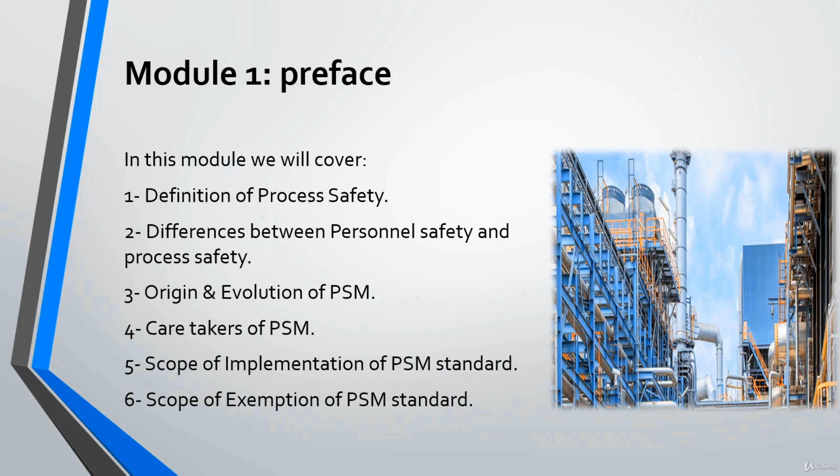Let's start by knowing what we are going to discuss in this section. We will have a clear definition of process safety management. We will know the differences between personal safety and process safety. We will look also through the origin and evolution of process safety management, who are the caretakers of process safety management, and also we will know the scope of implementation and exemption for this PSM standard, or the process safety management standard.

Okay, so let's start by defining what is process safety. Many definitions you will find throughout many organizations, but there is somehow a shared point between all of these definitions. The true definition of process safety is a disciplined framework for managing the integrity of operating systems and processes handling hazardous substances by applying good design principles, engineering, and operating and maintenance practices. So the true definition of process safety is to manage the integrity. The integrity is the prevention of major accidents by applying sound mechanical design and good engineering practices.

Okay? So now we want to know what are the key differences between personal, which is occupational safety, and process safety. In this table you'll find 10 points of differences between process safety and occupational safety. We will discuss them respectively. Number one, the frequency of incidents. The frequency of incidents relevant to process safety will be lower. If you look through incidents like Piper Alpha or British Petroleum Horizon, you'll find that these incidents are not the everyday event like any occupational injury or occupational illness.

However, the consequence of the incidents relevant to process safety will be catastrophic. So, low probability and very, very high severity. You will find this in contrast with occupational safety. As you can see, the frequency of incidents is much higher and the consequence of incidents is lower.

So now we're talking about the target. What is the target of process safety and what is the target of occupational safety? From the definition, you will see that process safety's target is to prevent the unintentional release of chemicals, while occupational safety's target is to prevent workplace hazards. I think the difference between the targets is very significant. Okay, moving on to the umbrella. Process safety protects everyone, while occupational safety doesn't. It only focuses on the workforce.

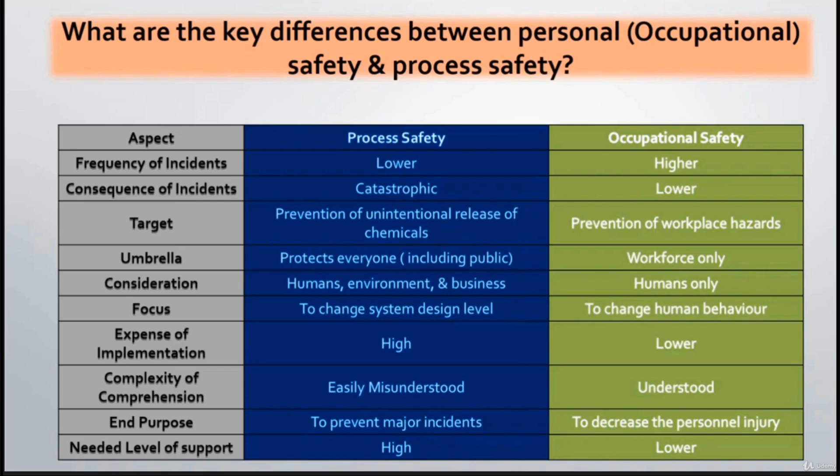It cannot be easily communicated or endorsed by the management. This is new stuff for them. They need to understand it well. That's why we are going to discuss the elements in detail. Specifically, you will find that the first element of process safety management as we move forward will be employee involvement. So you'll get the idea that this trend needs a lot of support.

Okay. Why should we have process safety management in our organization? Why do you want to have this system? What is the significance of having this system in your organization? I believe we have three main categories. You will find a moral reason, a legal reason, and a financial reason.

The moral reason: if you study or have looked through major disasters which happened in the past, like Piper Alpha or Deepwater Horizon, you will find that these incidents could have been prevented if only process safety measures were taken. You could have avoided all of these needless fatalities if only process safety management measures were applied.

What about the legal reasons? I believe you might need to have this system in order to comply with legislation and meet your legal obligations. And at last, the financial reason is to eliminate the catastrophic costs of process safety incidents. If you see the cost of an incident like Deepwater Horizon, it cost more than $62 billion, and we are talking about direct and indirect costs of this incident. Okay, moving on to the next slide.

When did the PSM appear? On July 17, 1990, OSHA, or Occupational Safety and Health Administration in the United States of America, published in the Federal Register number 55 FR 29150 a proposed standard called the Process Safety Management of Highly Hazardous Chemicals. This proposed standard was enacted in 1992, and further amendments were done in 1992, 1996, 2012, and 2013.

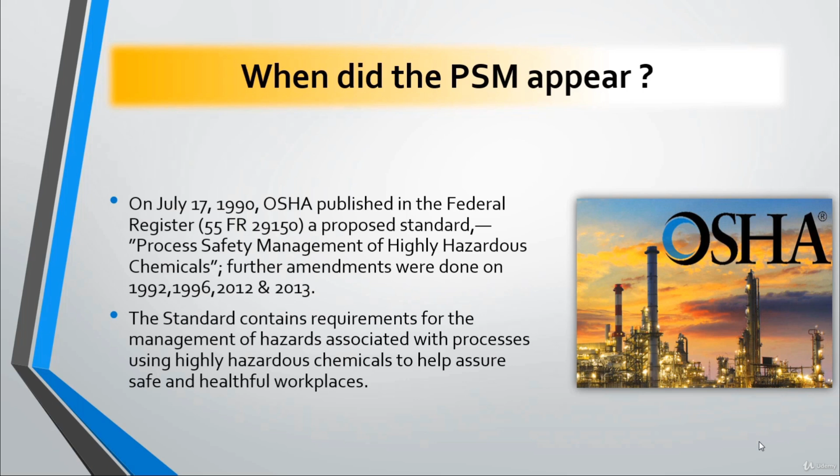The standard contains requirements for the management of hazards associated with processes using highly hazardous chemicals to help assure a safe and healthful workplace. This standard has 14 elements. We will discuss them in rigorous detail. Don't worry, you will know it all. We're just giving you the preface.

So now we are going to talk about who are the caretakers of process safety. We have number 1, OSHA, the Occupational Safety and Health Administration in the United States. We have the CCPS, the Center for Chemical Process Safety, also in the United States. We have the IOGP, the International Association of Oil and Gas Producers. We have the API, the American Petroleum Institute, and last we have the HSE, the Health and Safety Executive in the UK.

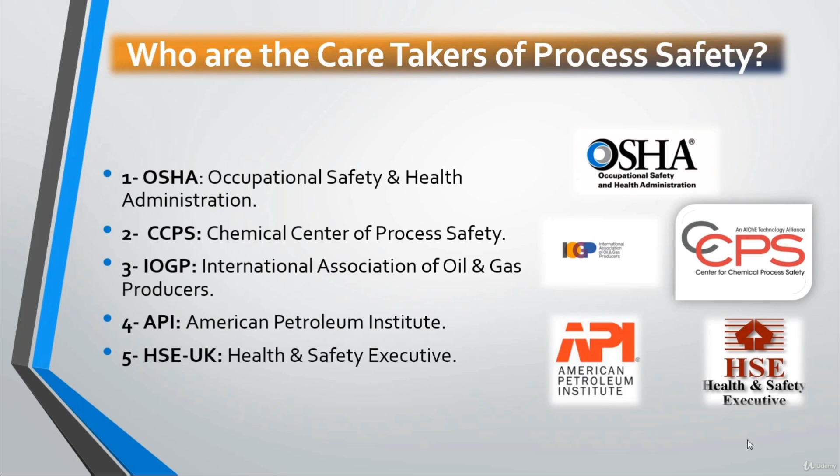Okay? Now we want to know what are the strategic approaches to process safety. Basically, we have 2 strategic approaches: the standard-based approach and the risk-based approach. This course mainly focuses on the standard-based approach. However, we are going to make some interrelations between the two. The standard-based approach entitles you to know what you should do, and this approach is adopted by OSHA. As you know, OSHA already published a standard that covers all the elements of process safety management.

While the risk-based approach is adopted by CCPS, and it entitles you to how to better manage the risk. The risk-based approach is derived from the standard-based approach. However, there are some more variations the risk-based approach has headed to, and we will also mention this along the pathway of the course. Okay, so now we're going to the standard-based approach.

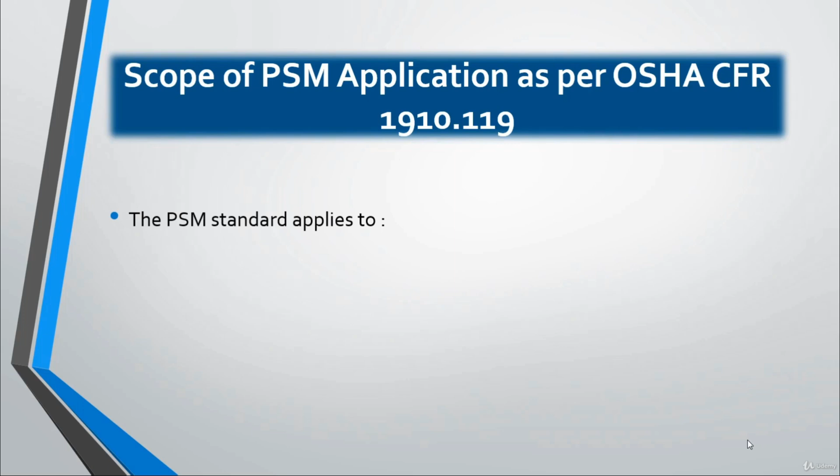What is the scope of application of this standard? The PSM standard is 1910.119. Number 1, this standard applies to a process which involves a specific chemical at or above the specified threshold quantities. From this statement we have a definition of process, and we want to know the threshold quantities. OSHA defines the process as any activity involving a highly hazardous chemical, including using, storing, manufacturing, handling, or moving such chemicals at the site, or any combination of these activities.

Now you already know the definition of process. We want to know what the threshold quantities are and what a highly hazardous chemical is. The threshold quantities cannot be exceeded whatsoever, because if they are exceeded, then you are facing a hazard. The hazard could be fire, it could be intoxication, it could be any other harmful event.

Regarding the highly hazardous chemicals, OSHA has released an appendix to this standard. This appendix contains 137 listed highly hazardous chemicals, and you will see the threshold quantities mentioned clearly. So if you are doing a process which involves a highly hazardous chemical at or above the threshold quantities in this appendix, then this standard applies to you.

I have already attached this appendix in the course resources, so you can check it to see the 137 listed chemicals and their threshold quantities. If you want to know how to calculate the threshold quantities, just ask in the course discussion board, and we can solve some problems together. So, what else does this standard cover?

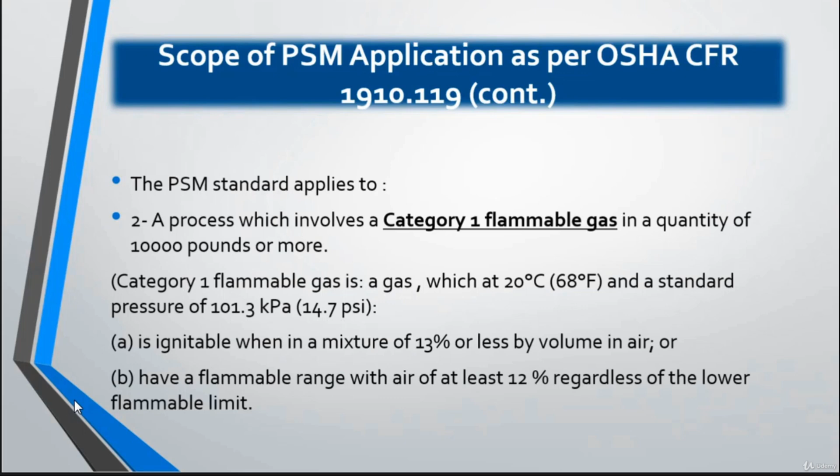What are all of these heebie-jeebies? Let's find out more. What is the lower flammable limit, what is the upper flammable limit, and what is the flammable range? The lower flammable limit, or lower explosive limit, is the lowest concentration over which a flammable gas or vapor can be ignited at a given temperature and pressure. This is the lowest concentration that can give you a flammable or explosive mixture with air. From the definition we see that they are talking about standard temperature and pressure, so 20 degrees centigrade and 14.7 psi.

And at last, what is the area of coverage for the PSM standard? It involves a process which involves a flammable liquid with a flash point below 100 degrees Fahrenheit on site in one location in a quantity of 10,000 pounds or more. What is the definition of flash point? The flash point is the lowest temperature at which the flammable vapor of the material will ignite when given an ignition source. This ignition will be a flash fire, which means it will not be continuous. If the ignition source is removed, the flash fire will cease.

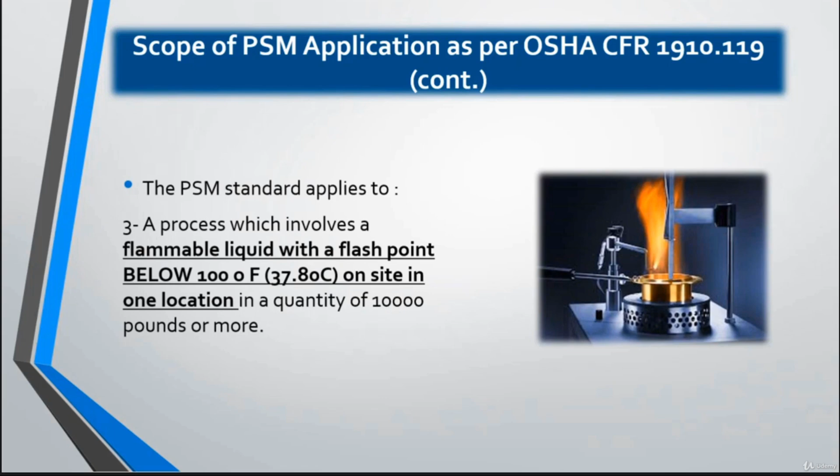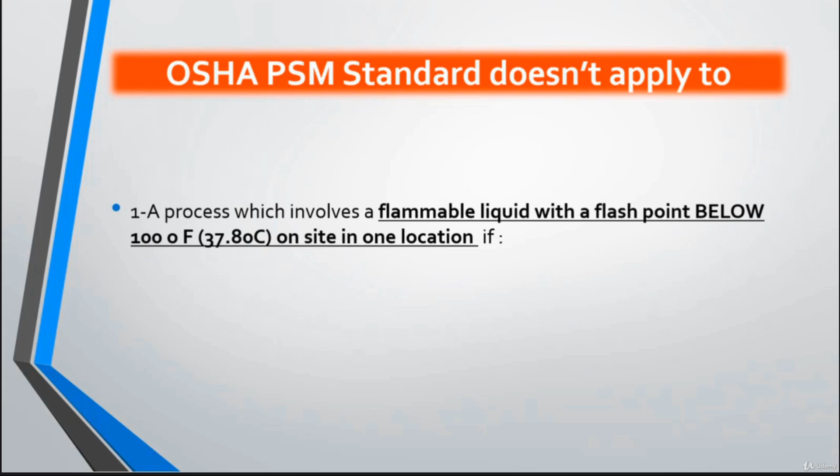Now, let's talk about the scope of exemption. What are the areas that the PSM standard doesn't cover? The PSM standard doesn't apply to a process which involves a flammable liquid with a flash point below 100 degrees Fahrenheit on site in one location if the hydrocarbon fuels are used solely for workplace consumption as a fuel. If you have a warehouse that uses this flammable liquid only as fuel, then this standard is not applied. B, if this flammable liquid is stored in an atmospheric tank or kept below the normal boiling point without benefit of chilling or refrigeration.

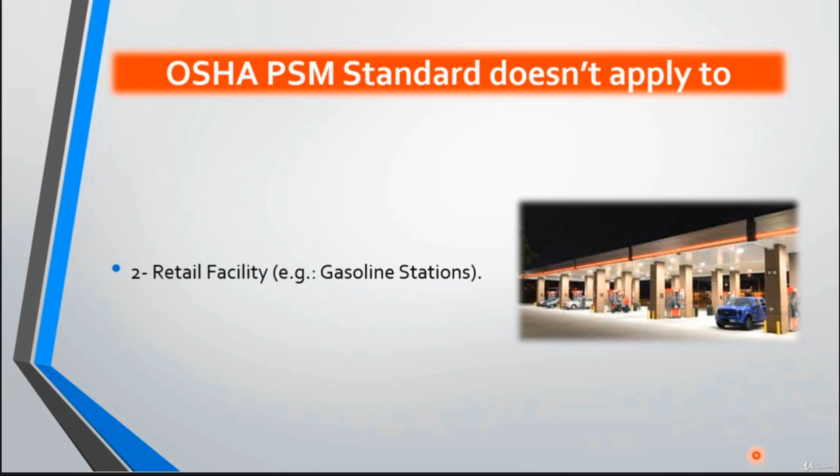The OSHA PSM doesn't apply to retail facilities such as gasoline stations. OSHA already released a retail exemption policy to exclude retail facilities from the scope of PSM. Why is that? Quite frankly, it's pretty strange, but OSHA doesn't believe that highly hazardous chemicals would exist in such a facility in a quantity of 10,000 pounds or more. The OSHA PSM standard doesn't apply to oil and gas drilling or servicing operations, such as platforms, workover rigs and so on.

At last, the OSHA PSM standard doesn't apply to normally unoccupied remote facilities, such as unmanned offshore platforms. By definition, a normally unoccupied facility is one that is operated, maintained, or serviced by employees who visit only periodically to check the operation and perform necessary operating or maintenance tasks. No employees are permanently stationed there, and the facility must be geographically remote in order to meet the requirements.

So hello and welcome to module number 2 of the PSM course. This module is the most important one as it is the core of our course, so it will be the longest and the largest. Okay, so let's go directly to module number 2. Let's start. In this module, we will cover the following.

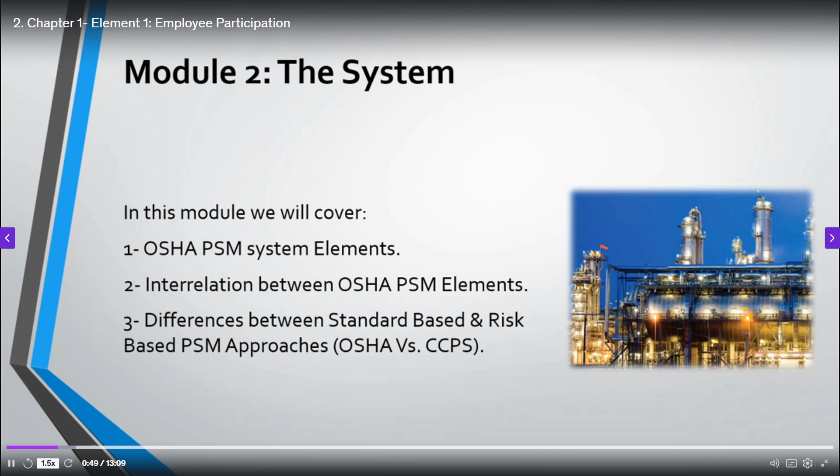It starts with employee involvement. If you recall, when we talked about employer involvement and the promotion of safety culture, we said that we will go to the first pillar of the PSM standard, which is employee involvement. And hence, they put it as the first pillar of the PSM system.

Number 2 will be process safety information, followed by process hazard analysis, operating procedures, training, contractors, pre-startup safety review, mechanical integrity, hot work, management of change, incident investigation, emergency planning and response, compliance audits, and at last, trade secrets. These elements are somehow interrelated, but first we will study each individual element separately, and at the end of this module we will see the interrelation between these elements.

Okay, so let's start with the first element, employee participation or involvement, also known in the European school as safety leadership. OSHA mandates the following regarding this element. Number one, employers shall develop a written plan of action regarding employee participation, which means that this plan should include how the employees are going to participate in order to promote the health and safety culture or the process safety culture.

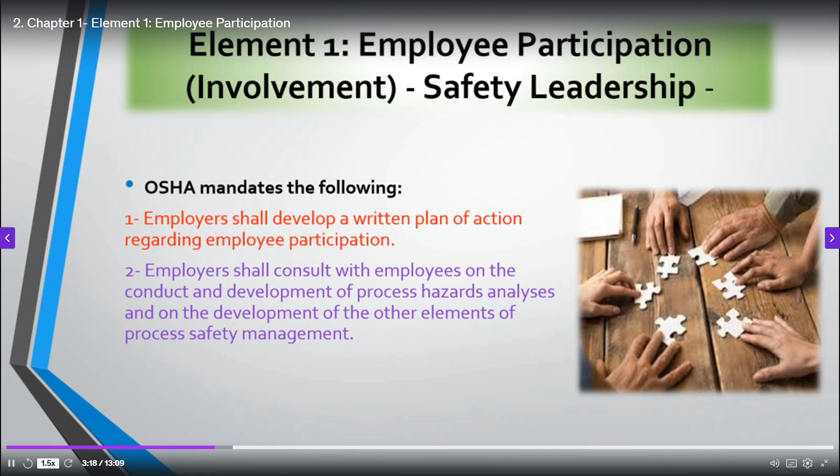Number two, employers shall consult with employees on the conduct and development of process hazard analyses and on the development of other elements of process safety management. Okay, so this paragraph entitles employers to consult with employees regarding the development of process hazard analyses and other elements of PSM. So basically this element defines how the employee shall participate in the development of PSM and how the employer himself should promote the process safety culture.

Number five, setting the targets. And at last, commitment towards continuous improvement. So these are the criteria which define a healthy process safety leadership. And these criteria must be endorsed by managers and directors. We are going to discuss the individual elements together. Now we are going to talk about criterion number one, which is the hazard and risk awareness of PS leadership.

History has shown that most disasters which happen in the world are due to three main reasons. Number one is a lack of technical knowledge by management, which means that the management is over-focused on administrative stuff and neglects the technicalities. Number two will be the lack of information, lack of reporting guidelines and reporting routes to the management. And at last, poor decision making and the underestimation of the consequences of decisions,

which means that sometimes management gets stuck with the technical staff taking some decisions that may affect the integrity of the plant itself. And such decisions could be like delaying plant maintenance of an old plant or cutting the critical staff, who are the people who are irreplaceable by all means and cannot be replaced easily.

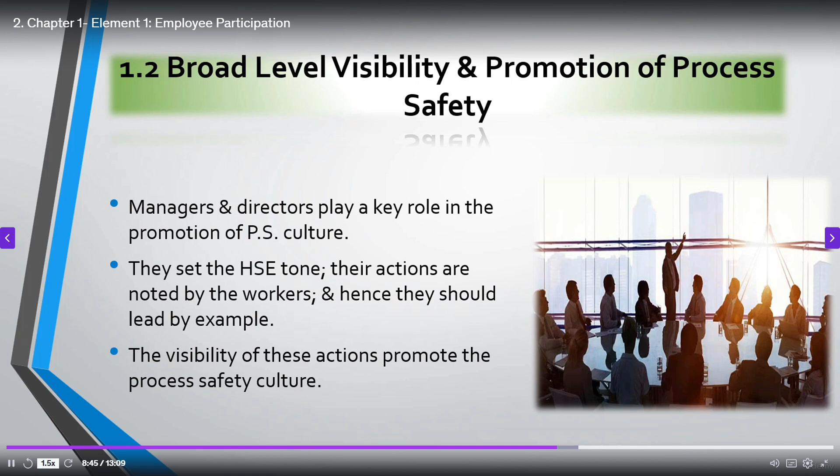Okay, moving up to criterion number 3, definition of responsibilities. This criterion is considered as one of the most important criteria in the definition of a healthy process safety leadership, which means that all responsibilities must be clearly defined and clearly communicated to employees. Everyone should know what they have to do, and this must be entitled accurately. Okay, so everyone who plays a role in the PSM framework should be held accountable for their actions, regardless of their organizational level, without endorsing the individual blame culture.

And if you take any trend of safety, like occupational safety or functional safety or process safety, you will see that no blame culture is the slogan of all of these trends. So you shouldn't endorse the blame culture in process safety.

Okay, moving up to the next criterion. The provision of adequate resources. If you recall in module number 1 regarding the comparison, process safety is more expensive. So I believe provision of adequate resources is a very important criterion in the definition of a healthy process safety leadership. So the resources can be human, the right number of people who have the right skills and experience; financial, which may include the capital expenditure and operational budgets.

And regarding this point also, we said in the table that process safety is expensive in comparison with occupational safety. So you can't expect an unlimited budget. Okay, it will not be reasonable to have an unlimited budget. However, under-resourcing is a risky business, so you should lie in the middle. And at last, the physical resources such as equipment, buildings, offices, rest facilities, and so on. I believe this is clear.

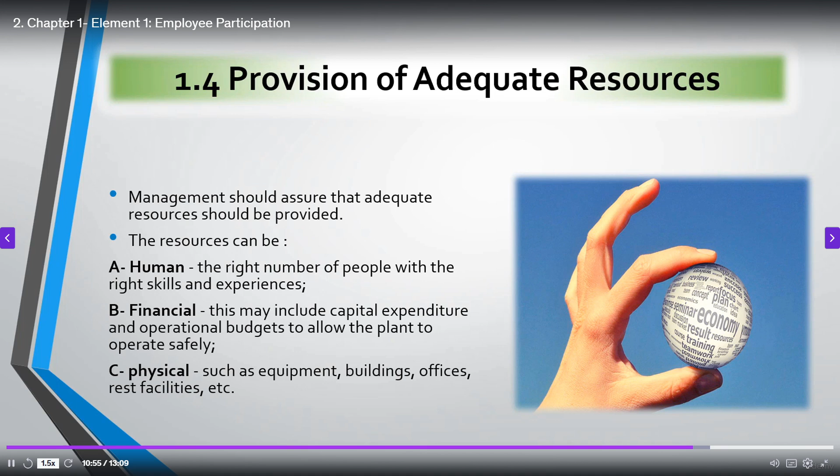Let's move up to criterion number 5, the setting of objectives. If you're not measuring, you're not managing. So you should have a clear and effective set of short-term and long-term process safety objectives. These objectives must be SMART, which means specific, measurable, achievable, realistic, and time framed.

These objectives also should be done in consultation with employees. The management shouldn't go on its own and set these objectives and force the employees to achieve them. No, this is not a healthy PS culture. We are talking about the involvement of employees, so the employees should be involved. So how do I know that my objectives are effective, or how do I monitor the progress of my process? You should set what is known as KPIs, or key performance indicators, and we will discuss this in detail in module number 3.

Okay, moving up to the last criterion of process safety management leadership, the commitment towards continuous improvement. As you know, any management system contains the cycle PDCA: Plan, Do, Check, Act. So you need to actively monitor your safety performance. The active performance measurement or active performance monitoring should be done throughout the benchmarking or throughout the auditing process. You will find where your system is exactly, and hence you will do whatever means is necessary to rectify and to assure continuous improvement of your system.

I believe now we have finished the criteria of a healthy PS leadership, and now the module or element number 1 is completed. Stay tuned for element 2.

Hello and welcome to element number 2 of the process safety management system. At this element, we will discuss the process safety information in detail. So let's hop aboard. What is the definition of process safety information? Process safety information is a set of written compiled information which concerns process CTE. CTE is an abbreviation for chemical, technology, and equipment. So C for chemical, T for technology, E for equipment. On the next slide, I'm going to set some examples of process safety information.

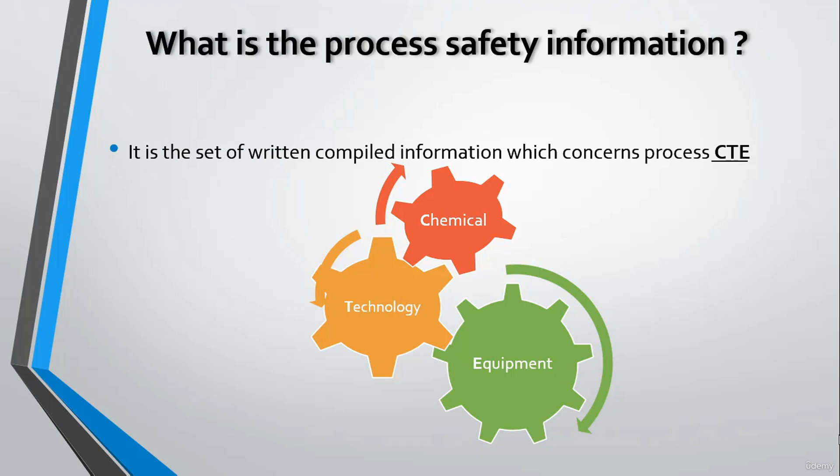Regarding the chemicals, we have the Standard Material Safety Datasheet, or MSDS for short. Also, we have the chemical analysis of multi-phase stream. Regarding the technology, we have the block flow diagram, process flow diagram, process chemistry, maximum intended inventory, safe parameters, evaluation of the consequences of deviations, also known as the worst case scenario evaluation.

And regarding the equipment, we have the material of construction, the P&IDs, or piping and instrumentation diagrams. We have the electrical classification, the relief systems and design basis, the ventilation systems design, the design code and standards, the material and energy balance, and at last the safety systems, which are the interlocks, detection, or suppression systems. We are going to illustrate some of these examples on this element.

So let's start by the chemicals. As you can see on this slide, we have 16 components of a standard material safety datasheet. The source of these components is OSHA 1910.1200. This is the standard which sets the requirements for a standard MSDS. OSHA PSM stated that it is mandatory to have, at least in the MSDS, the following components. Let me just get my laser pointer.

OSHA PSM said that we should have element number 6, which is the accident release measures. Element number 8, the exposure control measures. Element number 9, the chemical and physical properties. Element number 10, stability and reactivity of the material. And element number 11. So 6, 8, 9, 10, and 11.

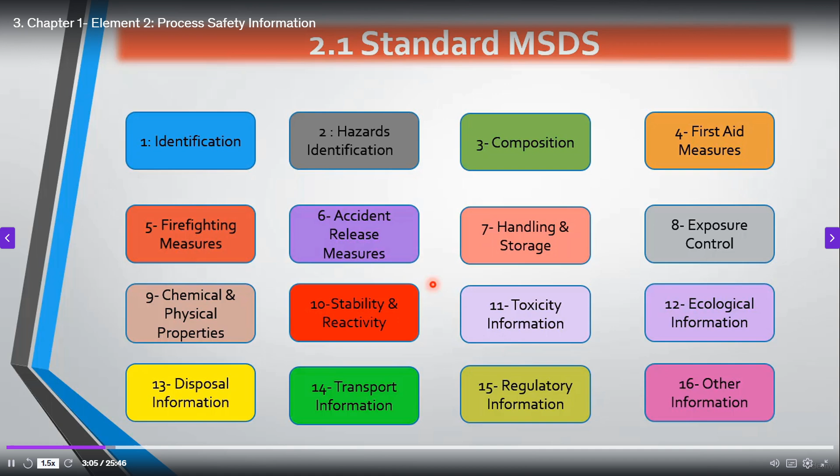Why are these elements mandatory in any MSDS? Because they are so relevant to the trend of process safety management, which is the prevention of major accidents such as fires, explosions, leaks, toxic gas releases. So it is very substantial for any MSDS to have accident release measures, exposure control measures, chemical and physical properties, stability and reactivity of the material, and toxicity information. I hope this is clear.

Let's move on. Regarding the technology, we will discuss the block flow diagram, the process flow diagram, process chemistry, and evaluation of consequences of deviations. So let's start with the block flow diagram. What is the block flow diagram? It is a simplified diagram showing major process equipment and interconnecting process flow lines. It also demonstrates information about flow rates, stream composition, temperature, and pressure.

But please be advised that this information is not necessarily present in all BFDs. So don't expect to have much information about the flow rates or stream composition. It's not mandatory to have it, but it is mandatory to have all the major process equipment and also the interconnecting process flow lines.

So let's use this BFD as an example. As you can see, the toluene here is going as a feed with hydrogen gas. The flow rate of toluene is 10,000 kilograms per hour, while the flow rate of hydrogen is 820 kilograms per hour. They go inside the reactor. The outcome will be the effluent, which goes to a separator, at which the gas is separated from the liquids. The gas goes up with a flow rate up to 2,610 kilograms per hour, while the liquid is going to a distillation tower, at which the benzene is extracted with a flow rate of 8,210 kilograms per hour, while the recycled toluene goes back to the reactor as a feed.

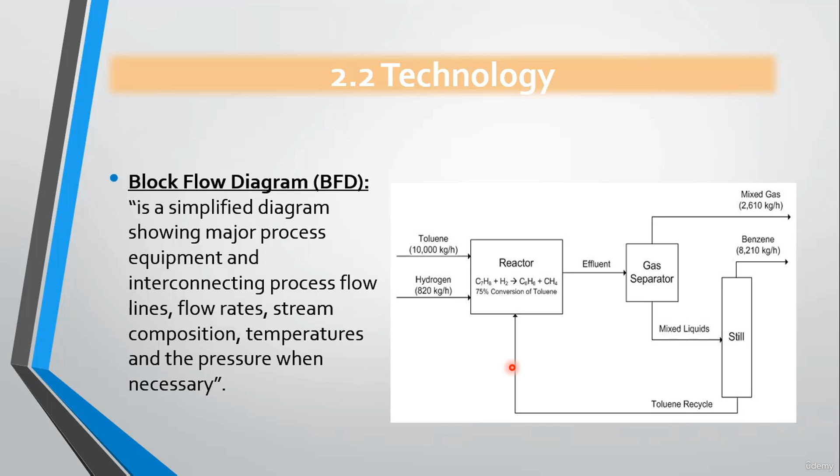So, in other words, it's just a preliminary diagram which demonstrates generic information about the process. And also, please be aware that the block flow diagram is also used as an input in the hazard identification studies or hazard studies, because hazard studies don't require that much level of detail, unlike other risk assessment studies such as HAZOP. Okay, let's move on to process flow diagrams or PFDs.

Here we have a more complex diagram which shows all main flow streams, including valves. Also, it shows pressures and temperatures on all feed and product lines. Also, it shows the points of pressure and temperature control. It gives us also information about the construction materials, pump capacities, compressor horsepower, vessel design pressure, major control loops, etc. So it gives you more detailed, more rigorous, more complex information about your process, unlike BFDs.

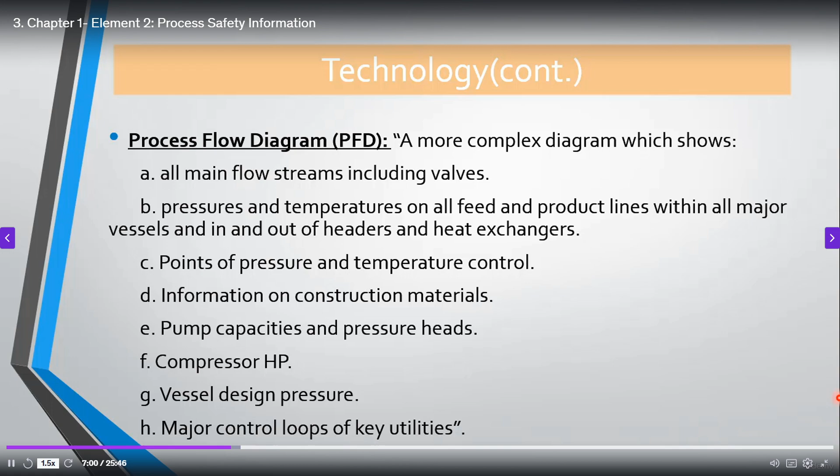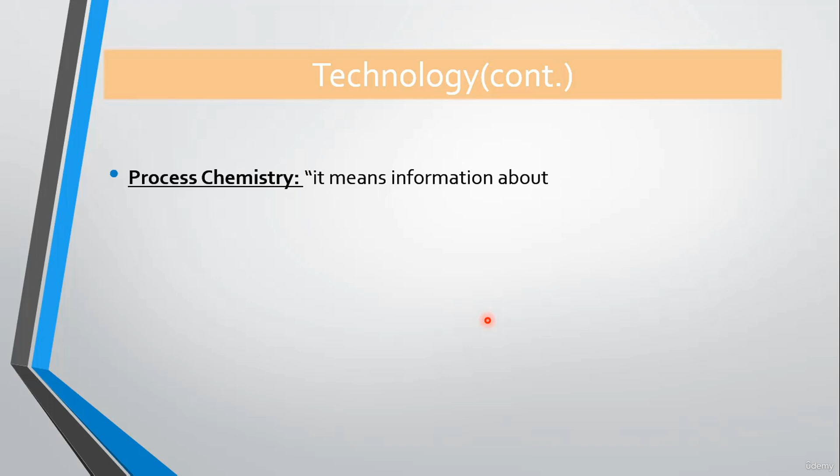Okay, let's move on. Let's go to the process chemistry. What do we mean by process chemistry or process chemistry information? Process chemistry information means information about the type of the facility, whether it is upstream, midstream, downstream, you name it. Also, it means information about the sorts of operations running inside, the types of chemical reactions and interactions. So, such information could be provided in the form of philosophy of operation, basis of design, design concept, whatever the name of the document is, it should provide the previously mentioned requirements.

So, in other words, the term process chemistry entitles to give you details about what is being processed in the plant and how is it done. Okay, hope it's clear. Let's move on.

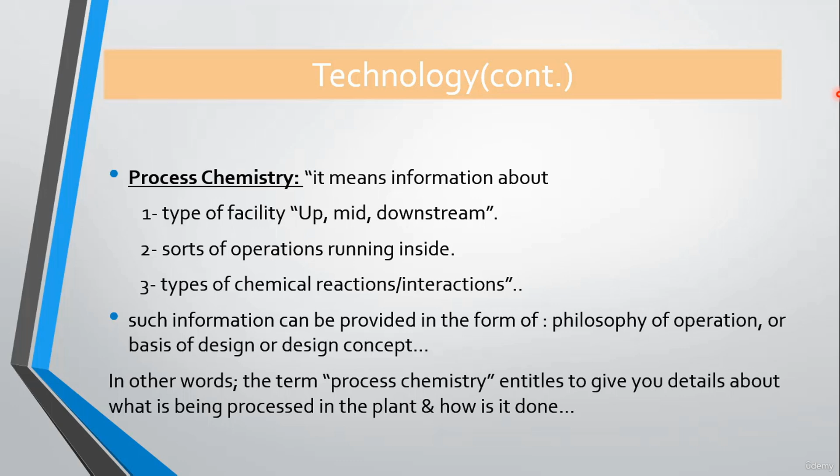The evaluation of the consequences of deviations. What is deviation? Or what is the definition of a deviation? A deviation is something which will go wrong or an outcome that is undesirable. So I need to evaluate the outcome of this undesirable event. How do I do that? Or how do I define the consequence of deviations? The answer for this is pretty simple.

We can use a technique called the what-if technique. And this technique will evaluate what will be the outcome if a deviation from the safe operating limits takes place. The what-if technique will be illustrated later on in element number 3, but let's focus on what we have right now. This evaluation will give us a rough assessment of the worst case scenario which may occur in the plant.

And also you can use software such as ALOHA. This software is developed by EPA and you can download it for free on their website. This software will give you a simulation or an estimate of the threat zone for fires, explosions, toxic gas releases, or BLEVE. But please be aware that this software is dependent upon knowing the maximum intended inventory, operating parameters, and others. Others include the wind speed, wind direction, the pipeline diameter, and so on.

Okay, so in the process safety information element, you need to evaluate the consequences of the deviations which may take place alongside the life cycle of the plant. I hope it's clear. Let's move on.

Now, enough talking about technology. Let's move on to the equipment. And here we are going to start with the material of construction. And I have a question in mind. Why should I have to know the material of construction for vessels, piping, or any conveying medium? Why? I will give you 10 seconds for this, then I will provide an answer.

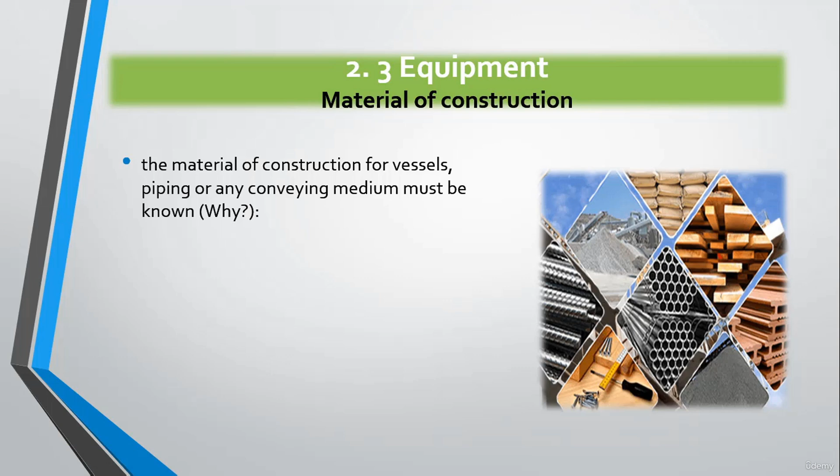There are two reasons why you should know the material of construction for any vessels, piping, or conveying medium. One, to assure the physical compatibility of it with the nature of operation running in place in terms of pressure, temperature tolerance, strength, stress, corrosion resistance, etc. And also it should consider the upsets in operation which can happen frequently or more often.

The second reason would be to assure the chemical compatibility of it with the conveyed medium, and this is done to prevent undesirable reactivity hazards. So, in other words, you should know the material of construction of your vessel, piping, or conveying medium in order to assure the physical compatibility and the chemical compatibility.

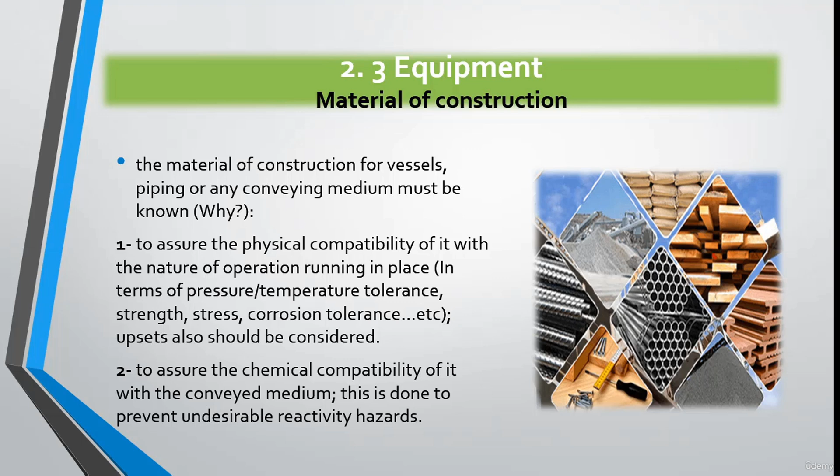Okay? Let's move to item number 2 in the equipment, the piping and instrumentation diagram. This diagram has a higher level of detail in comparison with the process flow diagram.

It contains all the information listed in the PFD, plus it describes the relationships between equipment and instrumentation, as well as other relevant information that will enhance clarity. So if you have a pyramid of detail regarding the process itself, you will start with the block flow diagram, above it you will have the process flow diagram, and on the top of the pyramid, you will have the piping and instrumentation diagram.

The next slide, I'm going to show you an example of it. This is an example of a typical pig launcher. As you can see here, the level of detail is much more advanced, much more rigorous. You will have different types of valves, vents, flares, kicker lines, and instrumentation, pressure transmitter, whatever is existing, and it is very, very detailed, as you can see.

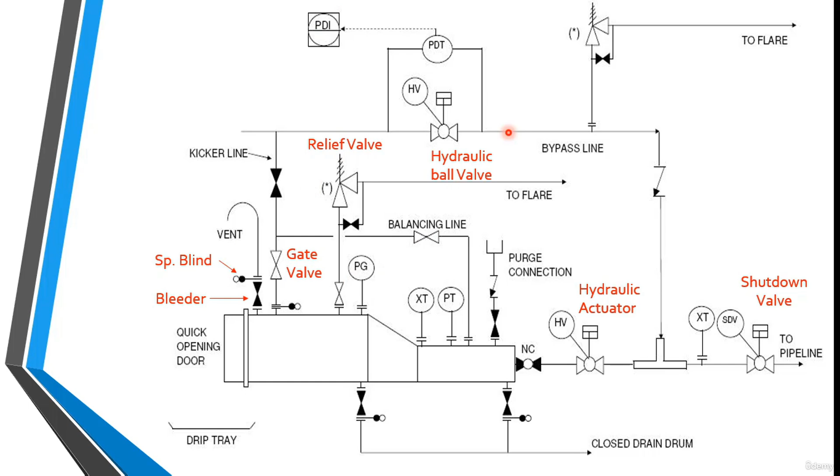Okay, so how do I know all of these symbols? This is a very important question. How do you figure out what this symbol means? A quick tip for you, there are two standards that you can use to identify the symbols stated in the P&IDs. You can use the ISO 14617-6 or you can use the ANSI ISA 5.1. These are internationally recognized standards. You will find most of the symbols of the P&IDs within them. You will have a better knowledge about all of them.

But be aware that the legend symbols of the P&IDs may be referenced or custom tailored, and I mean here that the company may have custom designed or custom tailored symbols that the company itself chose to put as a symbol on the P&ID. So be aware of that. The advice for you is to seek the legend first, if available, before diving into standards. I'm just giving you a quick tip.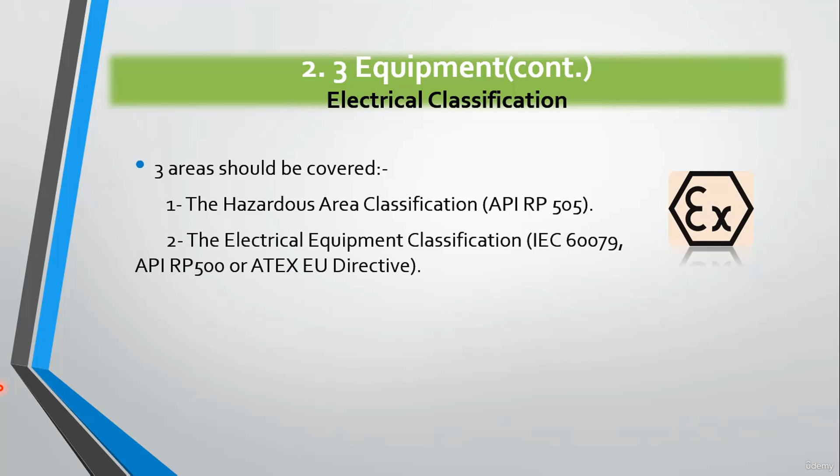Okay, let's move on. The electrical classification. Three areas here should be covered about the electrical classification. Number 1, the hazardous area classification. Whether it is zone 0, zone 1, zone 2, you should know the hazardous area classification and the basis of classification. And the best standard that you can refer to is API Recommended Practice 505. Number 2, the electrical equipment classification. And here I recall the standard IEC 60079, API Recommended Practice 500, or ATEX European Directive.

Okay? And number 3 is the ingress protection level of equipment. And please seek the standard IEC 60529. This will give you much better information about the ingress protection. So, in short, you should cover the 3 areas of hazardous area classification. You should know the area classification of your plant. And consequently, you should have a clear knowledge about the electrical equipment classification and the ingress protection in relation to environment. You will need such information for later use. Don't forget to have the datasheet for such equipment. This is a friendly advice. Forget that it is red tagged, but it is a friendly advice.

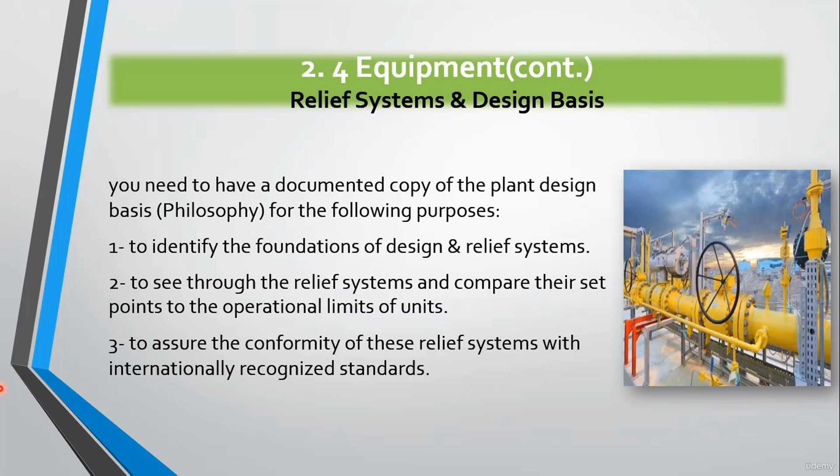Let's move on. Relief systems and design basis. You need to have a documented copy of the plant design basis for the following purposes. Number 1, to identify the foundations of the design and relief systems. And 2, to see through the relief systems and compare their set points to the operational limits of units. This is a very important and very critical information that you must have. At last, you should assure the conformity of these relief systems with internationally recognized standards. And here I recall the API standard 520, 521, and 2000. These are the best standards for relief systems.

Okay, moving on, we will discuss the ventilation systems design, and here I mean the enclosures, such as a power plant enclosure, switchgear enclosure, and etc. You should have the following information. Number one, the functional description of the ventilation system. You should know the description of the ventilation system, the fan control, alarm signals, normal versus emergency ventilation, and so on.

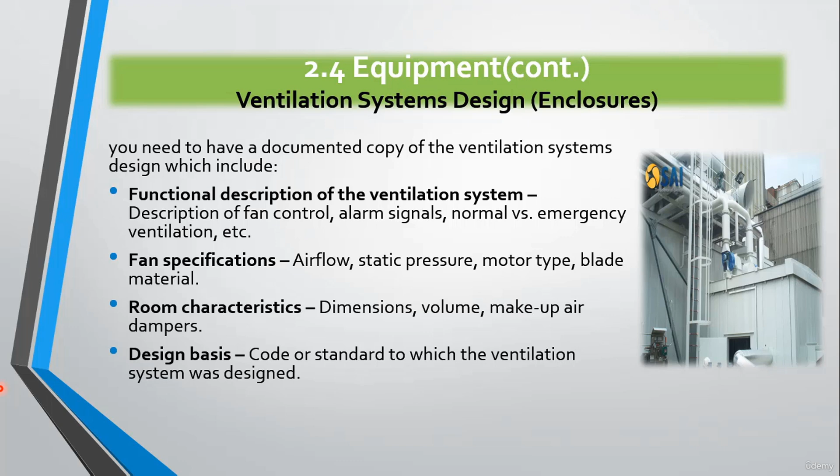Number two, you should know the fan specifications in terms of airflow, pressure, motor type, blade material, room characteristics, dimensions, volume, makeup, air dampers, design basis, code or standard to which the ventilation system was designed. And here I recall the best standards regarding the ventilation systems, which are the NFPA 30 and NFPA 58. Okay, moving on. The design code or standard.

As part of any process safety information, you should know the design code standard of manufacture or testing or maintenance or inspection of all equipment within the facility. This will give you assurance of the compatibility of use and maintenance of such equipment.

Be aware of that. As we discussed, if you recall, the material of construction, I said that we must know the material of construction in order to assure the chemical compatibility and physical compatibility. However, now on the design code or standard, you should know it all in order to give you assurance of an overall compatibility for use and maintenance.

Okay, moving on, let's talk about material or energy balance. Material or energy balance is a statement of the conservation of mass or energy as the material quantities pass through processing operations. In other terms, what goes in as a mass goes out as a mass, or what goes in as an energy must go out as an energy, provided that nothing changes.

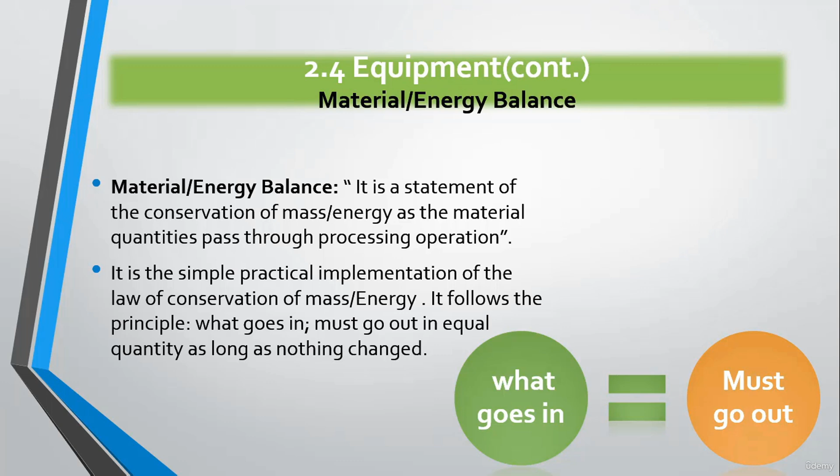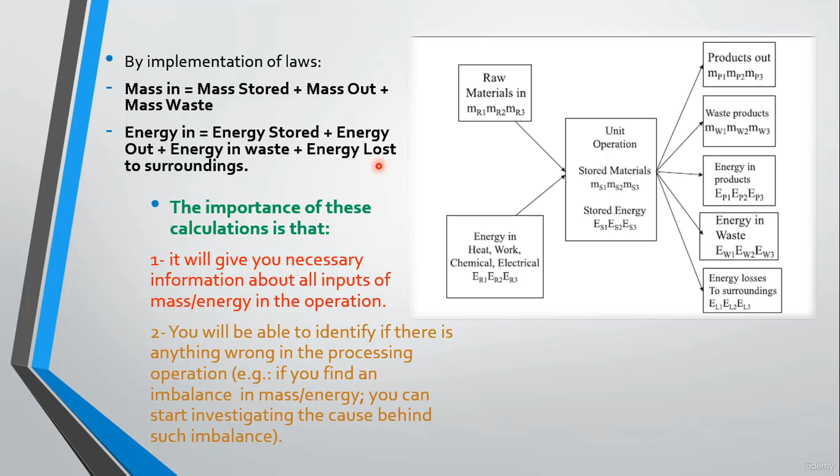For example, if you find an imbalance in the mass or energy, you can start investigating the cause of such imbalance. For example, if the mass here is not equal to the summation of this, or the product itself or the mass out is less than expected, you will start investigating the cause of such waste. And the same goes also for energy.

Okay, let's move on. We will talk at last about the safety systems, which are the interlocks, detection or suppression systems. Let's start with the safety interlock. The safety interlock is a feature that makes the state of two mechanisms or functions mutually dependent, which means that one mechanism cannot start without the presence or activation of another mechanism.

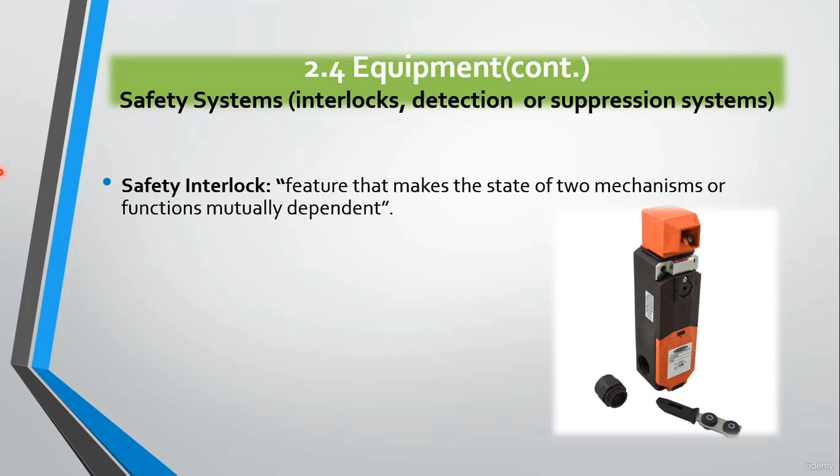A simple example of this is the safety pin, which exists on the fire extinguisher to prevent the extinguisher from being mistakenly or accidentally used. You will have to remove the pin first and use the extinguisher. So this pin acts as a safety interlock. The safety pin also for the pistol or the gun acts to prevent the gun or the pistol from being used or accidentally fired unless you unlock this safety pin.

Okay, so we have types of safety interlocks such as the trapped key interlock, microprocessor interlock, mechanical interlock, electrical interlock. Just know the names. You don't have to memorize anything. I'm just setting some simple examples. What about the safety detection systems? It includes any device that is able to detect process upsets or undesirable safety events.

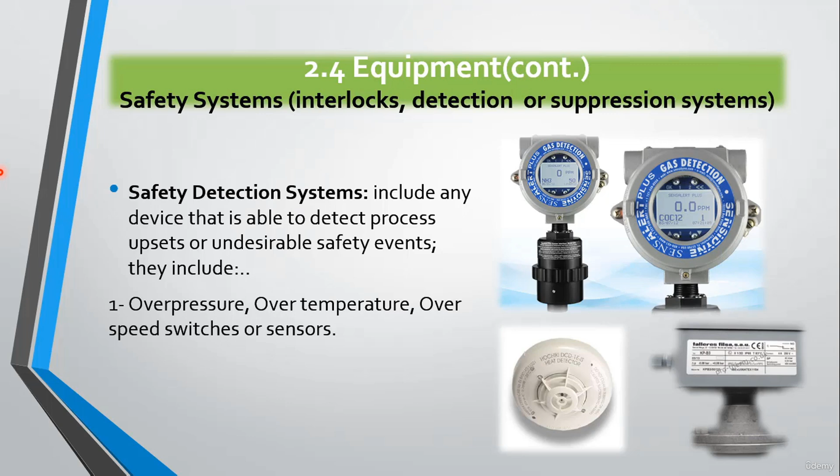So we are talking now about two layers of protection: the basic process control system protection layer and the fire and gas detection system protection layer. Okay, this includes the over pressure, over temperature, over speed switches or sensors. Number two, the fire and gas detection systems. The fire suppression systems include deluge rings, water sprinklers, chemical agents, total flooding agents such as the FM200, Inergen, CO2, etc. And also many more, of course.

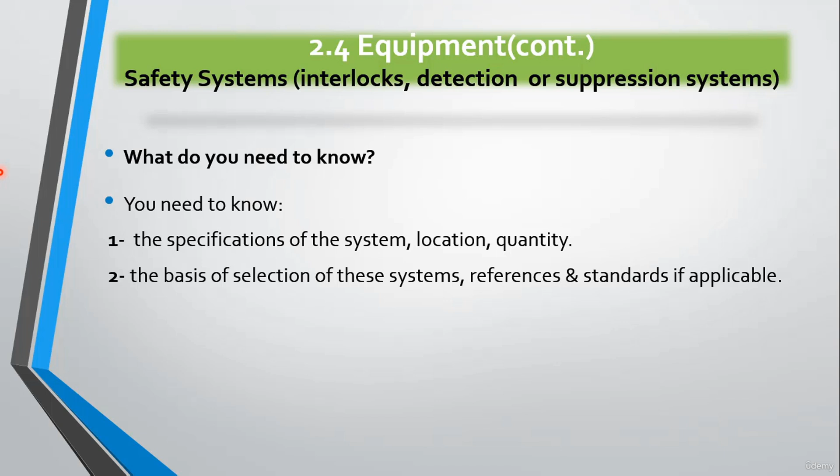So what do you need to know regarding the safety systems? You will need to know the specifications of the system, the location of the system, the quantities of the units used in the system. Number two, the basis of selection for these systems, references and standards if applicable. Number three, you will know the hydraulic and demand calculations of the suppression system to make sure that it covers the threat area. And at last, you'll have to know the types, basis of selection, allocation of fire and gas detection systems, and assure the suitability of them to the process type.

And remember, if the process safety information listed in element 2 is not or only partially available, do not proceed to element number 3 unless you fulfill them, because element number 3 depends on element number 2, and if element number 2 is not available or partially available, you will not have a successful or active or effective element number 3, which is the process hazard analysis.

You will not be able to do a correct or effective or accurate process hazard analysis unless you have appropriate inputs.

So hello and welcome to element number 3 of the process safety management system. This element will discuss the process hazard analysis, and I consider it as one of the most important, yet the most critical element of the whole process safety management system. So let's get started directly.

What is the meaning of process hazard analysis? Okay, the definition of process hazard analysis is an organized and systematic set of techniques to identify and analyze the significance of potential hazards associated with the processing or handling of highly hazardous chemicals. So, basically, the process hazard analysis is a combination of techniques or a set of different techniques which are used to identify and analyze the significance or the importance of potential hazards associated with processing and handling of highly hazardous chemicals.

Okay, the PHAs, which is short for process hazard analysis, analyze potential causes and consequences of fires, explosions, releases of toxic or flammable chemicals, and major spills of hazardous chemicals. So, as you can see, it is a very important and very critical element of the PSM system.

Okay. So, what does the PHA focus on? The PHA focuses on equipment, instrumentation, utilities, human actions, routine and non-routine, and last, it focuses on external factors such as the surrounding environment.

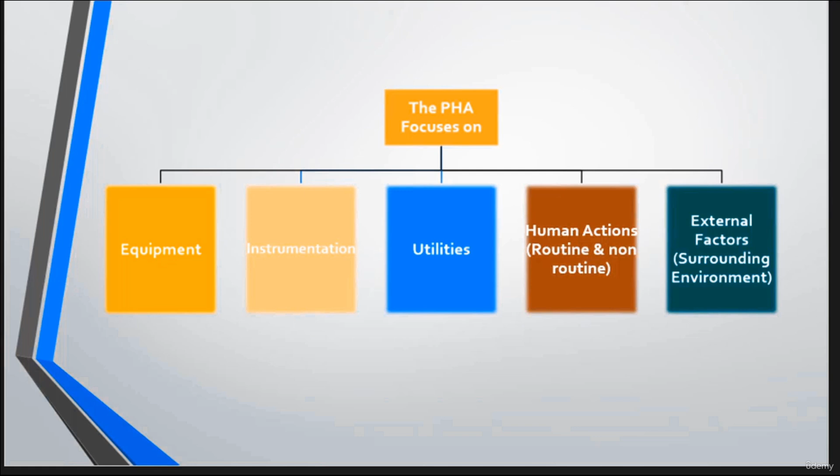Okay, but before we go in depth about the PHA techniques or the PSM related PHA techniques, let's have some definitions regarding the hazard, the risk matrix, the categories of PHA, the risk criteria, the tolerability of risk, the PHA team, main stages of PHA process, and the key elements of a high quality PHA. So you need to be familiar with all of these definitions before we get into depth regarding the PSM PHAs. Okay, so let's get started.

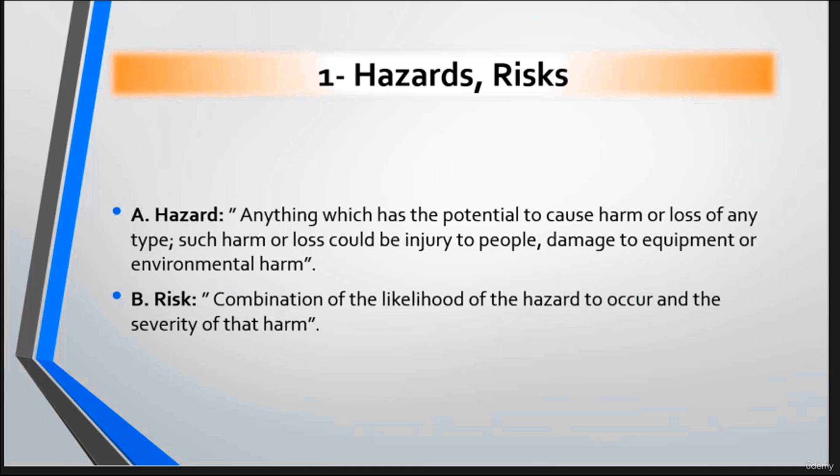What is a hazard and what is a risk? The hazard is anything which has the potential to cause harm or loss of any type. Such harm or loss could be injury to people, damage to equipment, or any environmental harm. While the risk is the combination of the likelihood of the hazard to occur and the severity of that harm. So it is the outcome of the likelihood, which is the probability or frequency, times the severity, which is also known as the consequence. Okay?

Okay, what about the risk matrix? What is the risk matrix? The risk matrix is a tool used in the PHA process to define the level of risk. It is used to give you a clear definition about the level of the risk, considering both probability and severity. As you recall from the previous slide, we said that the risk is the combination of the likelihood, which is the probability, and the severity, which is the consequence. So the risk matrix considers both probability and severity, and thus the matrix itself can be qualitative, semi-quantitative, or quantified, and we will get to this on the next few slides.

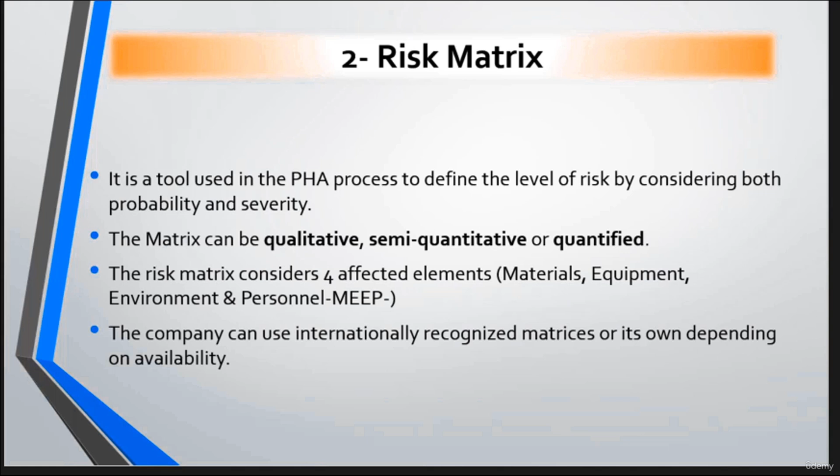Okay? We must also know that the risk matrix considers four major affected elements, gathered in the word MEEP. MEEP is short for material, equipment, environment, and personnel. So remember the word MEEP. The company can use internationally recognized matrices or it can use its own depending on availability. And it's better off to use the company's because you'll know it better and you will have a clear definition of risk criteria. So let's see some examples regarding qualitative, semi-quantitative, and quantitative risk matrices.

Okay, moving on. This is the semi-quantitative 5 times 5 risk matrix. As you can see here, the numbers are beginning to be introduced in addition to the ranges, and the numbers, of course, mean something. This will be referred to in the risk criteria, and this is another subject that we will go to further on in our program.

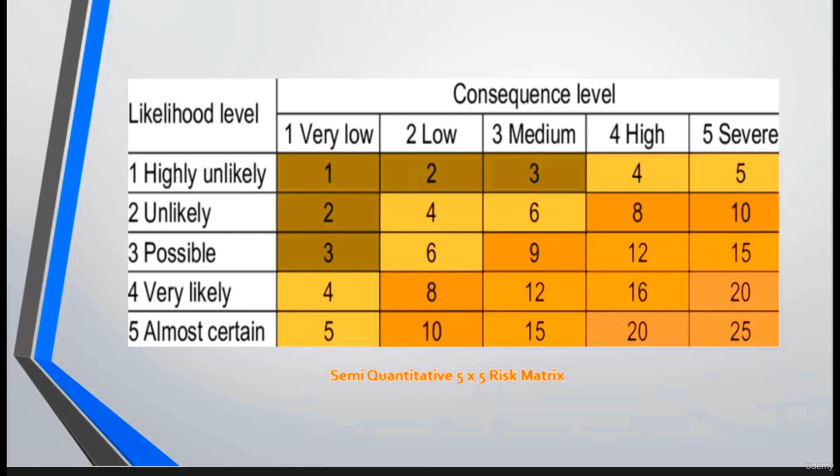So PHAs accordingly will be qualitative, semi-quantitative, or quantitative. In the qualitative risk assessment or PHA, the frequency and severity are determined purely qualitatively, which are the low, medium, and high, same as the risk matrix, while in the semi-quantitative, the frequency and severity are approximately quantified within the ranges of low, medium, high, while the quantitative uses pure numbers, and we said it before in the risk matrix.

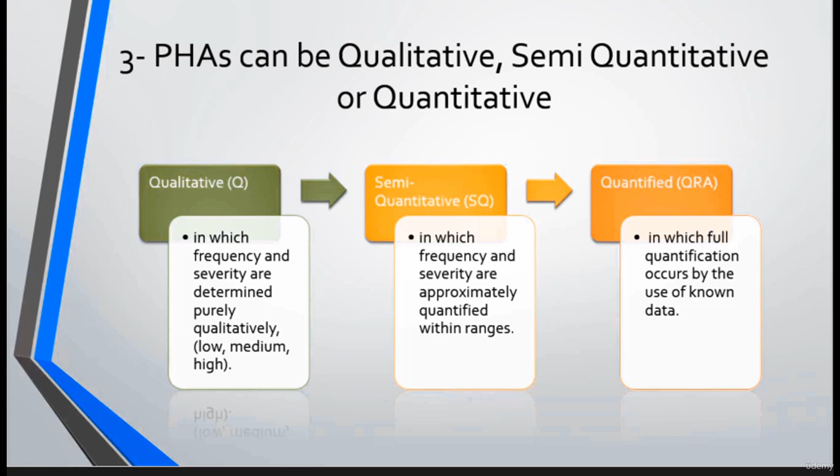So now we are going to move on to the risk criteria. The risk criteria here is very, very critical in the PHA process, as the definition of risk criteria must be done before conducting any sort of PHA. Because the definition of risk criteria will provide you with a suitable enumeration for all elements of the risk matrix, and I'm talking here about the consequence and the probability.

So the risk criteria is dependent upon four major factors. First, you should set the scale impact qualitatively or quantitatively. Second, you should define the tolerability framework, and we will come to this on the next slide: whether the risk is broadly accepted, ALARP, which is as low as reasonably practicable, or intolerable risk, and you should define them all. Third, you should define the method of expressing the probability. And at last, you should define the type and nature of consequences. And I will attach a document which serves as a very good guide for defining the risk criteria.

Moving on, let's talk about the tolerability of risk framework. We have three types of risks categorized according to the level of tolerability. Number one is the broadly accepted risk. And this risk means that there are no further measures needed in order to further control the risk. And this is generally concluded in a qualitative PHA.

And this broadly accepted risk doesn't require anything else. You will identify it and you will find that the existing control measures are more than enough to control the risk. Therefore, no additional control measures are needed. However, please be aware that you are the one who is defining the criteria for broadly accepted risk, if you recall from the previous slide.

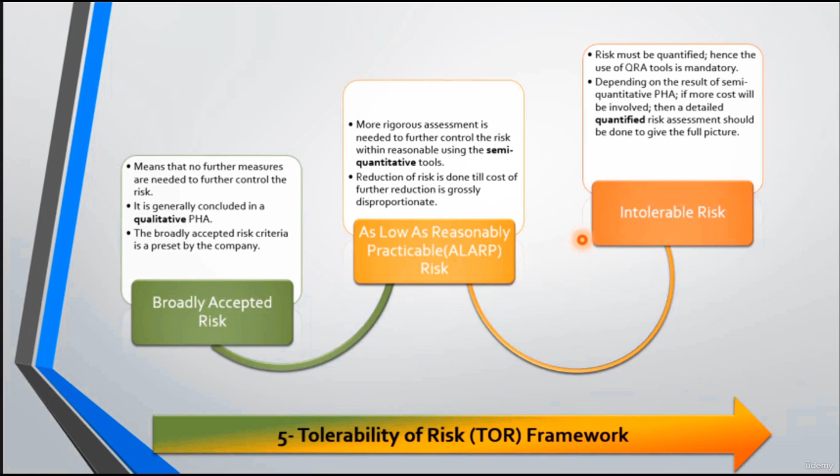However, I need more money in order to do that. So how do I show the management that I really need additional resources? This cannot be done appropriately unless you give them numbers, that they agreed on the risk criteria, that this will be my intolerable region. Remember this. That's why I told you that the risk criteria must be defined by the company or preset by the company. Okay? I hope this is clear.

Let's move on. Let's talk about the PHA team. The team should be competent enough to be grouped in the PHA team. And by competent, we mean that the members of the team should have enough knowledge, ability, training and experience. This is very important, very critical. OSHA mandates that at least one employee with experience and knowledge about the process being evaluated should be in the PHA team. So this is logical and nothing more to explain. OSHA also mandates that at least one employee familiar with the PHA technique should be also in the group. Okay, and I need to remind again that an incompetent PHA team will lead to poor and unreliable PHA results.

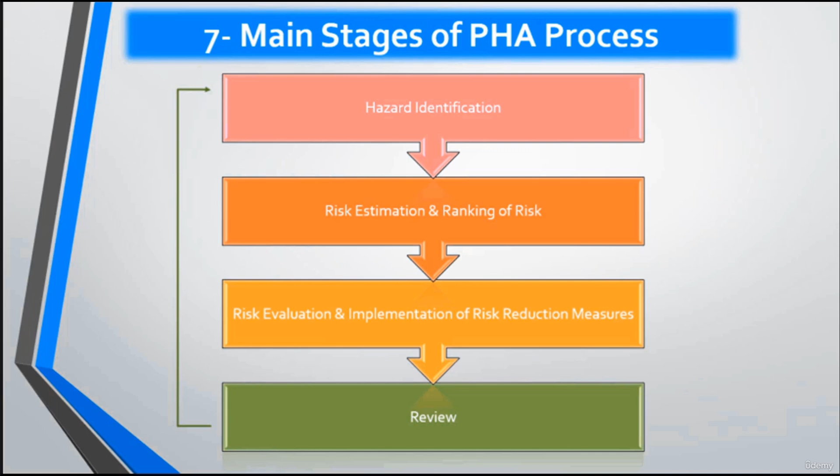Okay, so let's move on to the stages of any PHA. The main stages for any PHA process consist of the following. The first step will be the hazard identification. You should identify what are the hazards that are presumably existing or could exist. Number 2 will be the risk estimation and ranking of risk. Number 3 will be the risk evaluation and implementation of risk reduction measures. And at last, we will have the review. And the review aims to identify additional control measures that can further reduce the risk. And this happens frequently in the intolerable risk region, of course.

So, what are the key elements for high quality PHA? Just remember the 5 T's: team, technology, training, tools of analysis, and time. You should have a competent team. You should have the right technology for documentation. You should have a team with appropriate training, and you should use the appropriate tool of analysis. And at last, you should provide adequate time for performing the PHA.

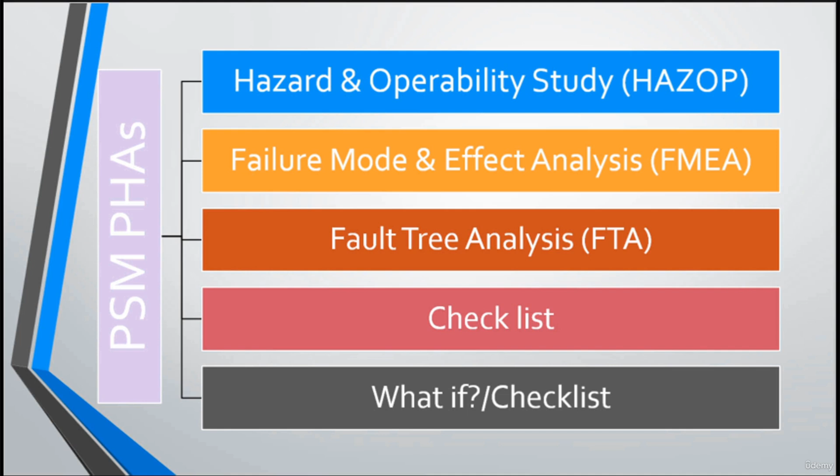So now we are going to talk about the types of PHAs stated frankly in the OSHA PSM standard. We have basically 5 types that were listed directly in the standard. They are as follows. Number 1, the hazard and operability study, also known as HAZOP. Number 2, the failure mode and effects analysis, also known as FMEA. Number 3, the fault tree analysis, FTA. Number 4, the checklist. And number 5, the what-if checklist technique. OSHA said also that other equivalent methodologies are accepted as long as they serve the same purpose. Okay, so let's agree on that.

If we are going to classify the types of OSHA PSM PHAs, then we will come to the following conclusion. Checklists are considered a lookup method, while supporting methods are like the what-if checklist technique, and scenario-based analysis is like the fault tree analysis, and function analysis is like FMEA and HAZOP. So this is just a categorization. It's based on the standard ISO 31010. It's just giving you a general framework of the general classification of the listed types of PHAs. So let's move forward and we shall start.

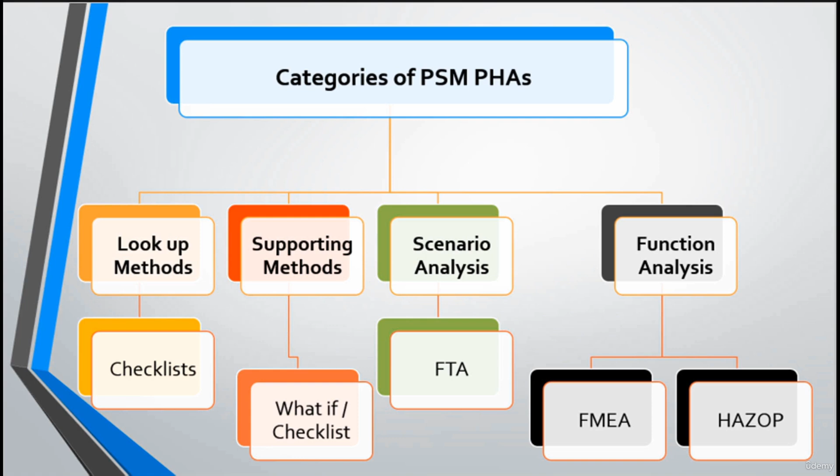Let's start with the hazard and operability study, also known as HAZOP. It's a thorough, structured, systematic, team-based guideword examination of a process or system to identify hazards in relation to process deviations, along with the provision of suitable control measures. So, what are the process deviations? Generally, there are 4 basic deviations, which are any change, either increase or decrease, in pressure, temperature, flow, or composition of the gas or the stream itself.

And the best reference that you can get to in order to have more detailed information regarding HAZOP is IEC 61882. This standard or recommended practice will give you very, very detailed guidance regarding the implementation and the actual carrying out of the HAZOP.

The HAZOP can be qualitative, as we mentioned before, if you recall, or semi-quantitative, according to the type and appetite of the management. And also, I would like to say that it is qualitative or semi-quantitative according to the level of risk as per the tolerability classification.

If you recall, we have the broadly accepted risk, the ALARP risk, and the intolerable risk. So if I am dealing with the broadly accepted risk region, there is no need to go to a semi-quantitative analysis. However, if you started with a qualitative HAZOP assessment and you found that some risks were in the ALARP region, you must go to the semi-quantitative technique of HAZOP. Remember that HAZOP is a cause-based thorough analysis, so the assessment is cause-defined or cause-based.

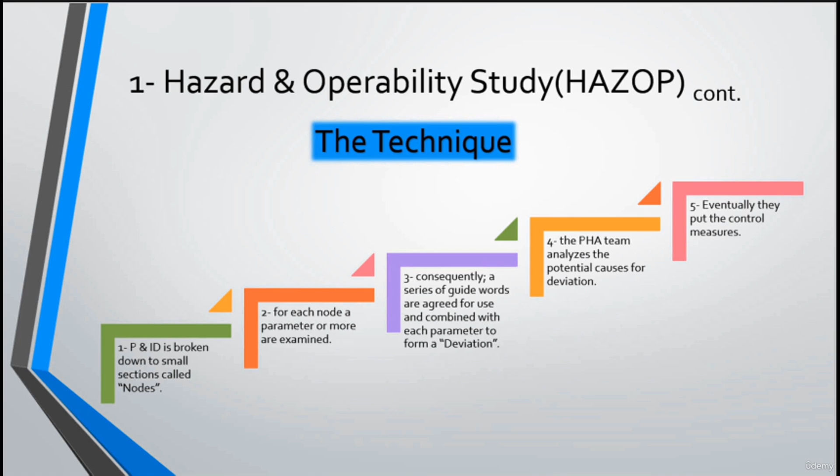I would like just to say that the most important process safety information for the HAZOP is the P&IDs. You must not start the HAZOP without a valid, verified, and as-built P&ID. Let's move on. After the HAZOP sheet is finalized, a closeout report must be issued with the required actions and recommendations for active follow-up and monitoring. Of course, the recommendations and existing plus needed control measures must be documented in the closeout report. The final sheet will look like this.

The HAZOP is a detailed analysis. And by detail, we mean that it will be very time consuming and therefore it will be expensive. Such detailed analysis will require a high level of documentation for the system or process and procedure specification. Also, HAZOP can focus on finding detailed solutions rather than challenging fundamental assumptions. For example, what if the equipment itself failed?

Because the HAZOP doesn't assume that the equipment, which will be the safeguard or the control measure for the deviation, fails. It assumes that it is operational and healthy all the time. So HAZOP doesn't challenge fundamental assumptions. And at last, the discussion of HAZOP can be focused on detailed issues of design and not on wider or external issues, such as environmental aspects and so on.

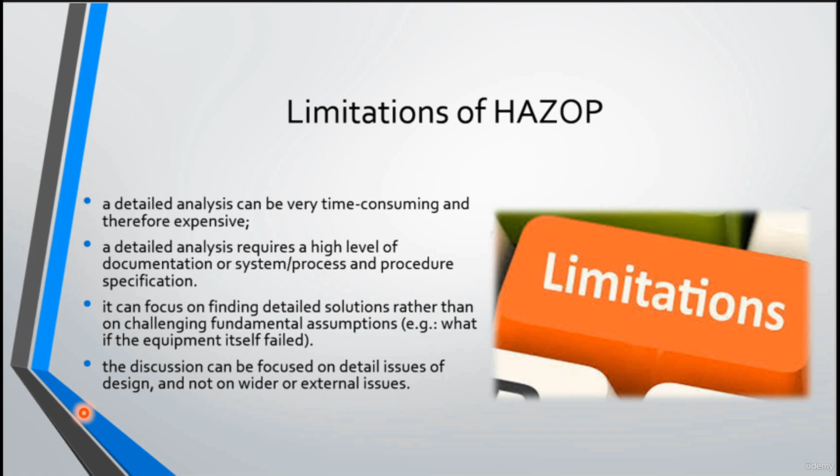I'm trying to provide you just a glimpse about the true meaning or the academic meaning of HAZOP. Now let's talk about the failure mode and effect analysis, also known as FMEA. What is the FMEA? The FMEA is a technique used to identify the ways in which components, systems, or processes can fail to fulfill their design intent.

So what is the definition of failure? The failure is the loss of ability to perform as required. Simple as that. The failure is the loss of ability to perform as required, or it is an event that results in a fault state of that item. And there are several types of failure. According to consequence: catastrophic, critical, major, minor, marginal, insignificant. And according to cause, it may be misuse, mishandling, weakness, etc.

The best standard that you can refer to in order to have more detailed guidance regarding the FMEA is IEC 60812. Moving on. The FMEA identifies all potential failure modes of various parts of the system. Number 2, the effects these failures may have on the system. Number 3, the mechanism of failure itself. And number 4, how to avoid the failure or how to mitigate the effects of these failures on your system.

From the terminology itself, we identify the failure. Number 2, we identify the mode or the type of the failure. Number 3, we see the effect of that failure on our system. And number 4, we make the analysis to study the risk in order to reduce it or eliminate it if possible. On the next slide, we show some popular types of FMEA: design FMEA, process FMEA, service FMEA, software FMEA. We are going to focus on the process FMEA.

Moving on, we will go to how to do the FMEA technique. As you can see from this graph, we start by identifying the failure mode itself. Following the identification phase, we identify the effect of that failure, which is what will happen as a result of that failure. Number 3, we identify the severity, how severe the impact is to the user, the customer, or the process. Number 4, we identify the cause of such failure. Number 5, we see the occurrence, the likelihood of such failure.

Number 6, we see something called the detection mode. By detection mode, we mean what controls are currently in place to spot such failure before it happens, or detect it if it happens. Following that, we see the detection itself, which is the probability of such failure to take place without it being detected. Afterwards, we shall conclude the RPN.

The RPN is the risk priority number, which is the result of multiplying the severity with the occurrence, which is in other words the risk. As you recall, the risk is the combination of the likelihood of the event and the severity of that harm. Finally, you need to take action: whether the present control measures are enough or you need additional control measures. The risk priority number tells you which failure mode should be acted on first, and that concludes the FMEA technique.

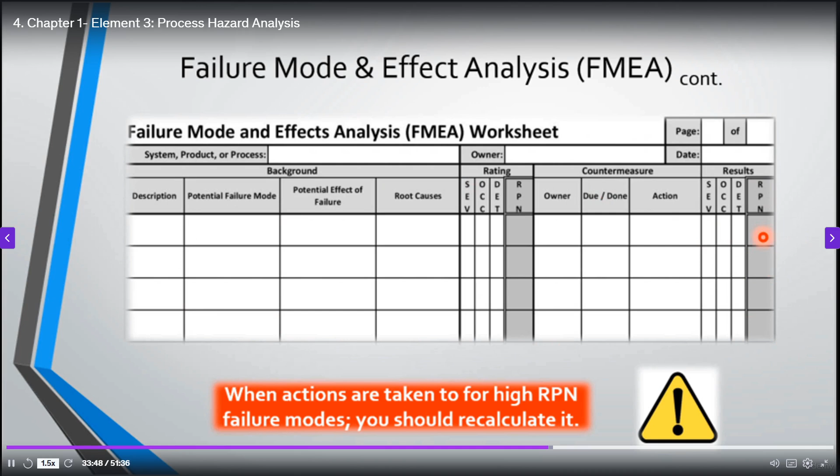So I believe I gave you an insight about the technique of the FMEA. Let's talk about the limitations. Number 1, they can be used only to identify a single failure mode. You cannot combine multiple failure modes together. Number 2, unless adequately controlled and focused, the studies can be time-consuming and costly, same as the HAZOP. Number 3, they can be difficult and tedious for complex multi-layered systems.

As we said in the first limitation, they can be used only to identify a single failure mode. How about studying a complex multi-layered system? I believe it will be difficult. So this should conclude a brief insight about the FMEA. Let's move on. Now we are going to discuss the fault tree analysis, or FTA for short.

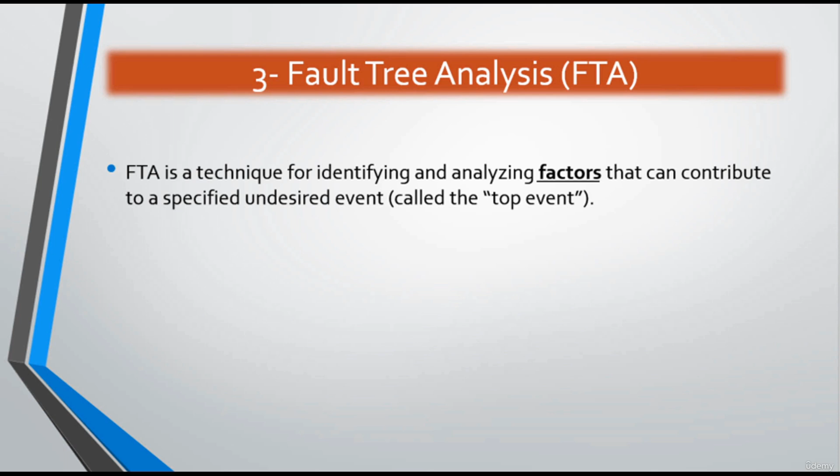The fault tree analysis is a technique used for identifying and analyzing factors that can contribute to a specified undesired event, which is called the top event. The causal factors are deductively identified, organized in a logical manner, and represented in a tree diagram. That's why they call it the tree analysis. And this tree diagram depicts the causal factors with their logical relationships to the top event.

The FTA is considered to be the best alternative to FMEA. As you recall, we said that the FMEA cannot discuss combined failure modes altogether. However, the fault tree analysis can do that. The FTA can be qualitative or quantitative, and I prefer the quantitative method to be used in the functional safety assessment for safety integrity level, or SIL, determination, and this is another topic, of course.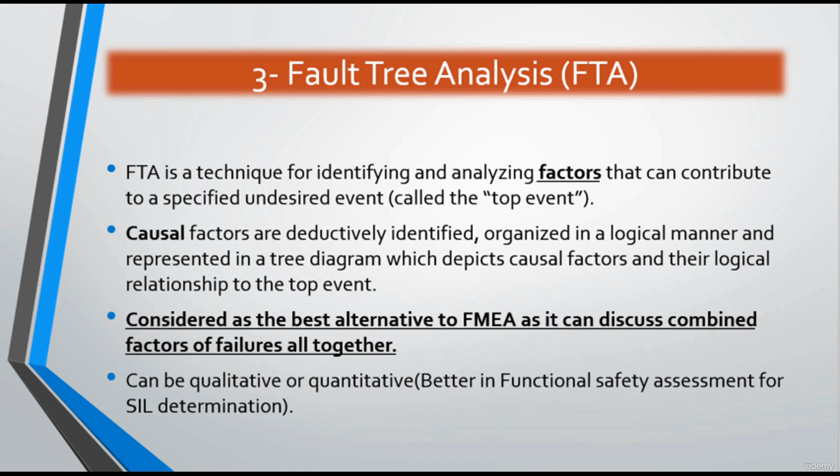The best standard that you can refer to for more detailed guidance about the FTA is the IEC 61025. Just remember that the fault tree analysis follows the top-down approach. So now let's discuss the technique. We have here the top undesired event. What are the causal factors of this undesired event? We will have intermediate event number 1 or intermediate event number 2. Any one of them will be inserted in the logic gate of OR to the top undesired event.

What causes the occurrence of intermediate event number 1 or number 2? The basic event number 1a and the basic event number 1b, through the AND logic gate, will give rise to intermediate event number 1. And the basic event number 2a and basic event number 2b will give rise to intermediate event number 2. Intermediate event number 1 or intermediate event number 2 will give rise to the top undesired event.

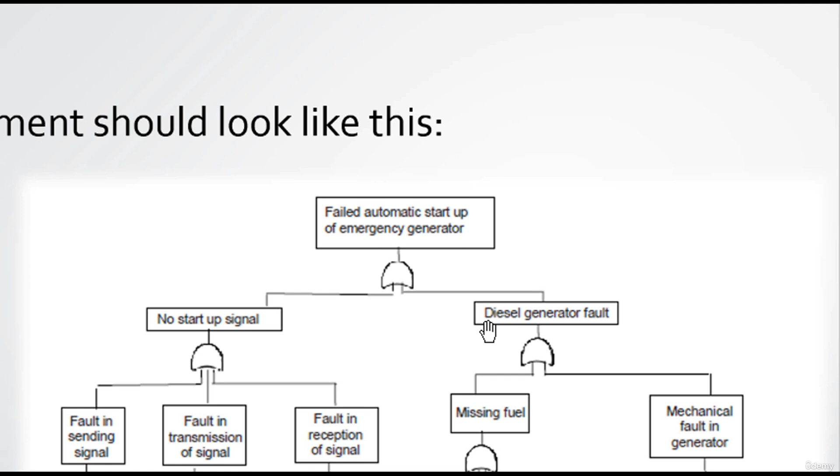Here we have this diagram. Let's zoom in. So here we have the failed automatic startup of emergency generator. What will be the causes? We have a diesel generator fault or no startup signal. This is the OR gate. What causes the diesel generator fault? It could be a mechanical fault in the generator, or it could be due to lack of fuel. So what causes the lack of fuel? It could be due to absence of fuel or blocked intake.

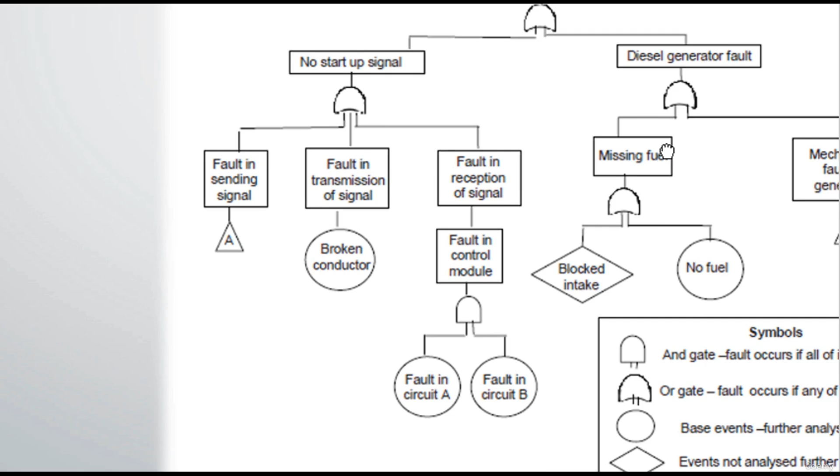This is the OR gate, okay? Let's take the other branch. We said here that there is no startup signal. What are the potential causes of no startup signal? It could be a fault in the sending signal, a fault in the transmission of signal, or a fault in the reception of signal. And this is the OR gate. So these are 3 different causes.

Following that, what could be the cause of a fault in the transmission of signal? It will be due to a broken conductor, while the fault in the reception of the signal could be due to a fault in the control module, and the fault in the control module will be due to a fault in circuit A and a fault in circuit B, and this is the AND gate. I believe it's clear. So I've given you a practical example of a fault tree analysis.

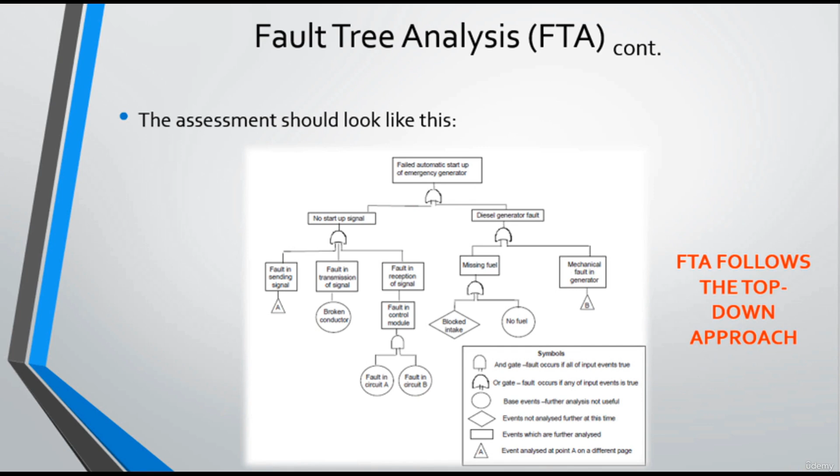Let's move on to the limitations of fault tree analysis. Number 1, uncertainties in the probabilities of base events are included in calculations of the probability of the top event. This could result in high levels of uncertainty where base event failure probabilities are not known accurately. However, a high degree of confidence is possible in a well-understood system.

Number 2, in some situations, causal events are not bound together. You cannot insert an AND gate or an OR gate. Number 3, fault trees can only deal with binary states, failure or not failure only. Number 4, a fault tree is a static model. Time interdependencies are not addressed, and here we are talking about failures over time.

Number 5, human error modes cannot be easily included. You cannot just say that human error is a part of the causal factors to the base events, because you're assuming that this human will do his job as required. And at last, it doesn't enable the domino effect, such as in the bow-tie model, and we will talk about the domino effect in the incident investigation element. So I believe this is all of the fault tree analysis. Let's move on.

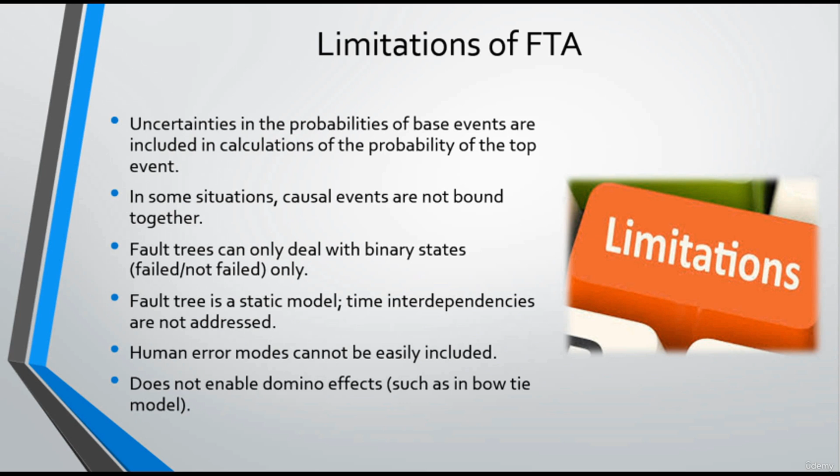Now we are going to address checklists, and this is an easy one. A checklist is a list of hazards, risks, and control measures that have been developed usually from experience, either as a result of a previous risk assessment or past failures. How are we going to create this checklist? First, we define the scope of activity. Second, a checklist is selected which adequately covers the scope you have defined. Last, the team uses the checklist to step through each element of the process or system and reviews whether items on the checklist are present or not.

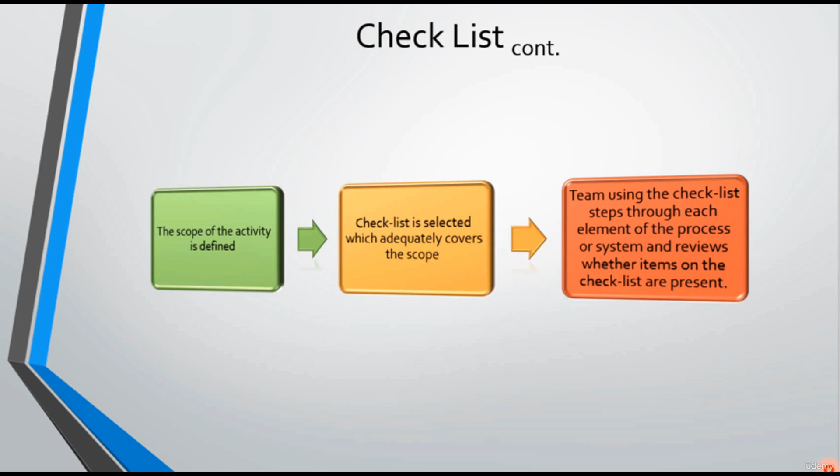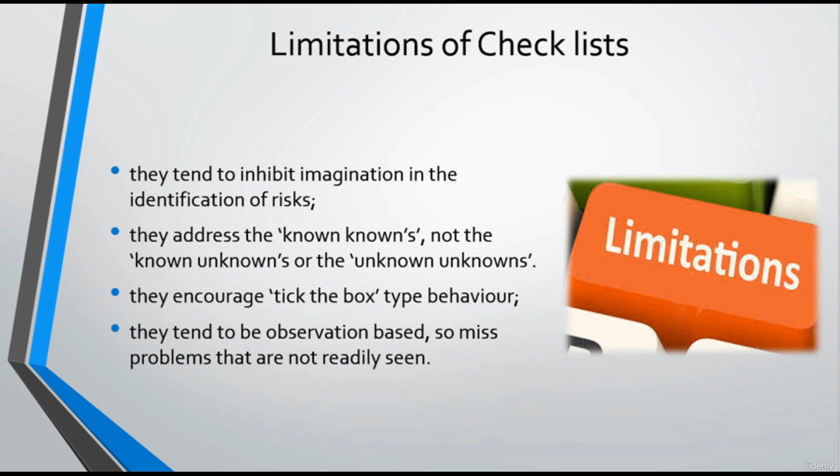Number 2, they address the known knowns and not the known unknowns or the unknown unknowns. It's based on experience, not brainstorming, so you cannot assume that additional risks or control measures are present. It doesn't encourage you to do this. Number 3, they encourage tick-the-box behavior. Number 4, they tend to be observation based, so miss problems that are not readily seen.

At last, let's go to the structured checklist, or what if. This is a combination of the checklist and the what if technique of the PHA, using a defined, detailed, and structured approach. So you are combining the acquired knowledge or experience of the checklist with the brainstorming of the what if. You will have the structured what if checklist.

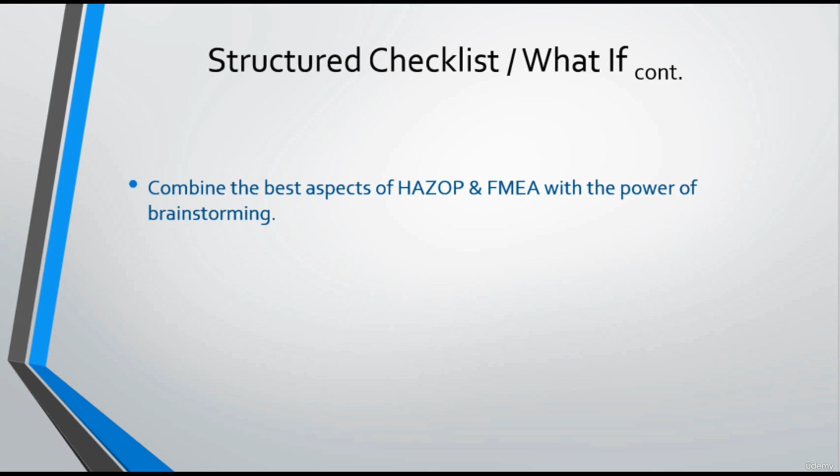So the structured checklist what-if combines the best aspects of HAZOP and FMEA with the power of brainstorming. Number two, it can be used to look at the system from any angle without any restriction of structure. Number three, it's better used for identifying issues outside the boundaries of other studies. It's easily understood, of course, and can be used by less experienced users. And it is a more rigorous assessment than HAZOP and FMEA.

So let's talk about the technique. Step number one, you generate process variable deviation questions, such as what if the flow is too high or too low. Number two, you generate the failure mode questions for each component. This step is the cause identification step, at which you will discuss the failure mode questions, such as what if the flow transmitter fails with a false high flow indication. You are now combining the techniques all together.

Number three, you generate other questions using checklists, and this is done by experience. And at last, you generate other questions using brainstorming. So you have combined it all together. You have listed the process variable deviations from the HAZOP. You generated the failure mode questions from FMEA. You used the checklist to generate questions. And at last, you used your brainstorming or the brainstorming of the PHA team to generate other questions.

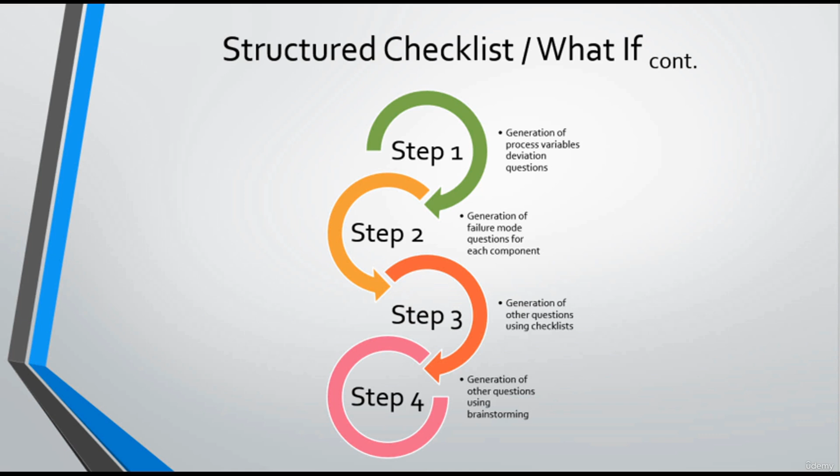What are the limitations of checklist what-if analysis? It requires, of course, a great deal of focus on specific parts of the process in order to avoid a scattered approach. Number two, it requires a lot of discipline not to take shortcuts, because if you recall, there are several steps. You should go through them respectively, so you shouldn't take any shortcut, and this is very important, and that's why it requires discipline.

I believe now we have finished all the listed or required PHA techniques by the OSHA PSM standard. Let's move directly to the applicability of techniques for PHA. We have listed here the 5 types of techniques which were stated in the OSHA PSM standard. And as you can see, we've listed the risk assessment process elements regarding risk identification, consequence, probability, level of risk, and risk evaluation.

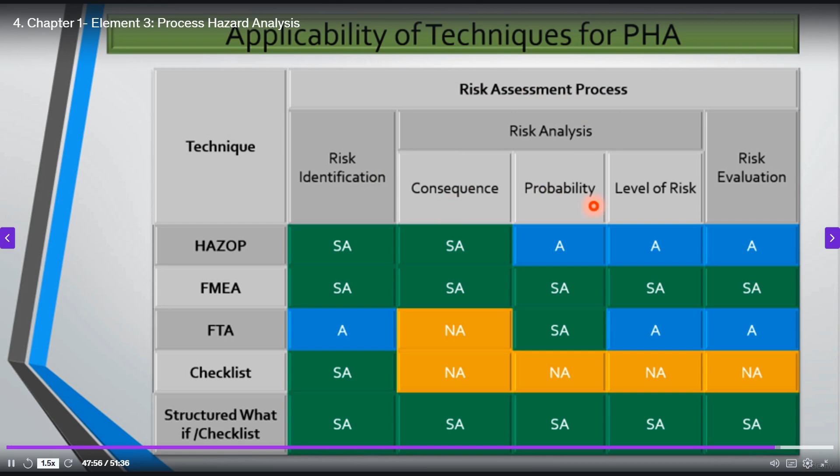You will see here the applicability, and you will find that the structured what-if technique, along with FMEA, are strongly applicable throughout all phases. The source of this table is the ISO standard 31010. I will attach it to the course resources, and you can get to it for further guidance.

Let's talk about the attributes of selection for PHA techniques. This is done in relation to the influencing factors, which are the resources and capability, the nature and degree of uncertainty, the complexity, and the ability to provide a quantitative output. So if we talk about HAZOP, you will see that it requires a medium range of resources and capabilities, and it has a high degree of uncertainty. It's also high in complexity and doesn't give you a quantitative output.

FMEA requires medium resources and capability, a medium degree of uncertainty, and a medium level of complexity, and can provide a quantitative output. Fault tree analysis requires a high deal of resources and capability, has a high degree of uncertainty and a medium level of complexity, and can also provide a quantitative output. The checklist doesn't require a high deal of resources and capability. It doesn't have a high level of uncertainty. It's not that complicated, and of course, it cannot give you a quantitative output.

The structured what-if checklist technique requires a medium level of resources and capability, and you will have a medium level of uncertainty. The level of complexity will be medium, and it doesn't give you a quantitative output. I've listed this table in order to give you an overview of the relevance of influencing factors to the techniques stated by OSHA PSM.

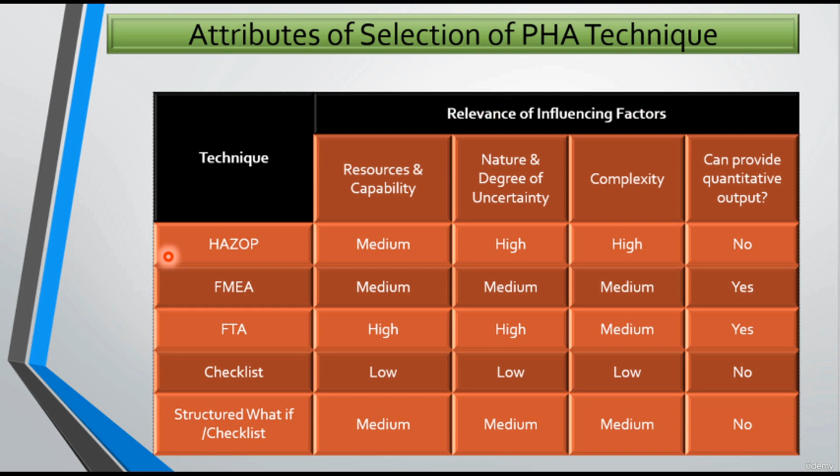So, what to choose after all? I can tell you frankly that there is no magic bullet for all. You can't just use one type of PHA technique and go all the way with it. As we have seen in the previous slides, different types of techniques serve different purposes. You will need to combine various types of PHAs in order to cover the different aspects of the process.

At last, what about the review cycle of PHA? OSHA mandates that PHAs should be reviewed periodically with an interval of no more than 5 years. So at least every 5 years, you should review the PHAs that you created.